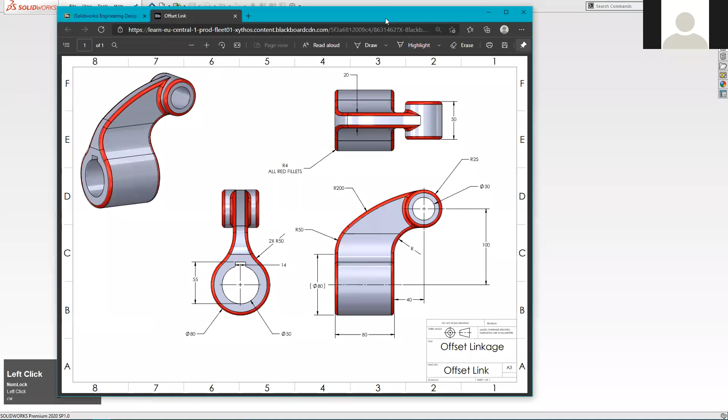In this week's session, we're going to continue with a little bit of that work that we sort of stopped halfway through last week. If I remember rightly, we were modeling up that linkage part. So it would be, if I just share my screen, that drawing that I seem to remember we were trying to replicate. And we got a certain way through the actual task of doing that.

So correct me if I'm wrong, but we'd sort of modeled the majority of the body of this. We'd done the lower pipe and we'd done the upper pipe. We sort of started the job of creating the spine that links them together. And the various groups that I take for this module got to different points of success creating that spine. So I think some of the groups moved on to creating this fillet feature,

and some of the rest of the groups were still, if I just load up one of my copies of that, let's have a little look. 2021 lessons. So something like this one, I believe, is where we left it, where there was possibly a bit of a discrepancy between the bottom of the spine feature that we just created and the lower tube. There was a sort of wedge of material that was missing. So I think more or less all the groups got to that sort of stage.

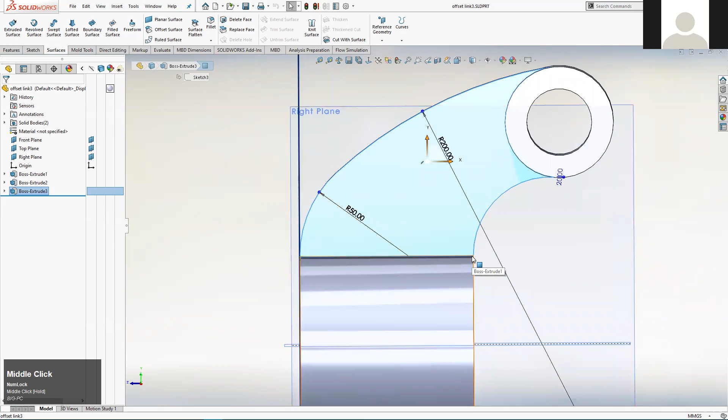And I think at the time I said, well, the sketch that we've created for this spine feature, or this piece of material that's joining these two tubes together, because we'd sketched it on the right plane there, we were actually looking at this lower tube like that, and we were creating a horizontal line there to close the sketch off, but that horizontal line was corresponding to the highest point on the tube there.

And obviously, as our extrude feature extrudes outwards from the sketch, the tube kind of drops away from it. So the tube is obviously a cylinder, so it's dropping away all the time. So you end up with this wedge of material that's actually missing. So I think the first thing that we'll do is we'll drop back into the sketch for that spine feature that we created with an extrude, and we'll address that.

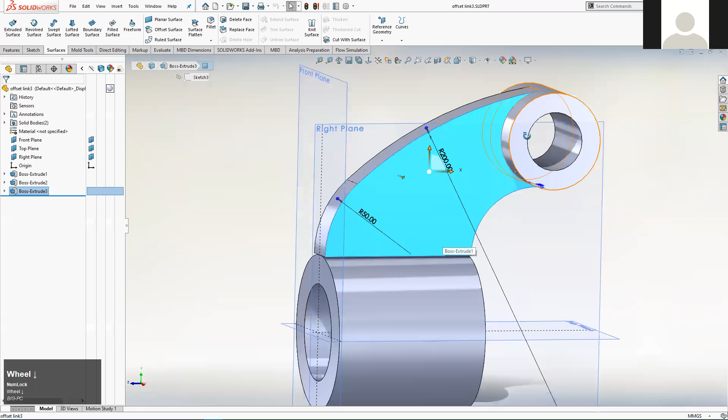And I think what we'll do, it should be more or less obvious, we'll lower this bottom edge down into the tube, so there's overlap then between the new feature that we're creating and the existing feature, which is the tube. And then what the system should do, which is its default behavior, is it should essentially weld them into a single piece of material. So it will merge them together into a single block of material.

And I think I talked with most of the groups about the fact that that's the default behavior of the system. If two features overlap each other or touch each other on any of their faces, the system will merge them into a single piece of material. And just to investigate that a bit further, you can see with the upper tube, because our new feature does in actual fact touch the upper tube, we created that arc in the sketch that matches the outside diameter of that tube. The system has actually welded those two together into a single block of material. So you can see I've highlighted it in blue on my screen there. So yeah, that's the default behavior.

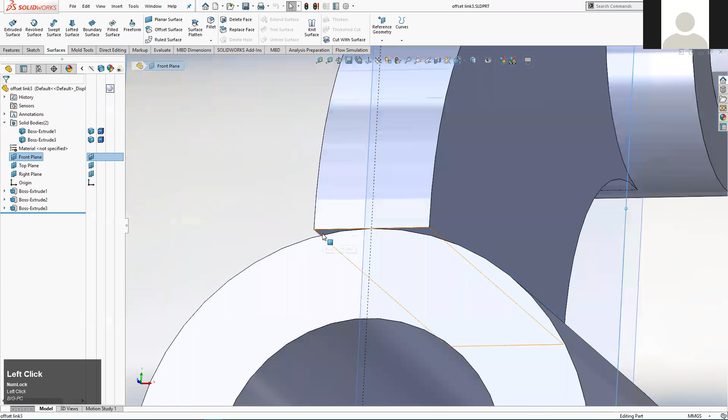But then if you don't get positive overlap, which we haven't got here, we've got the lower face of our new feature, this flat face, just theoretically touching the tube at an infinitesimally small contact patch. So the more you zoom in using this graphics window, the smaller that patch gets. So essentially they're not overlapping, they're not touching. So the system has refused to merge them into a single piece of material. So we're now going to correct that.

We're going to go into the sketch, modify the sketch, create some overlap there, and then the system should merge them together. Now what we're going to find is the system has set some options in that extrude that mean that we have to do a little bit more work to get them to merge now. But it's worth knowing how to correct these little problems that you may encounter.

So the first thing, let's go into the sketch. So in order to edit a sketch which is being used to create a feature, you just find the feature over here in the feature manager. So it's this last feature, this Boss Extrude 3.

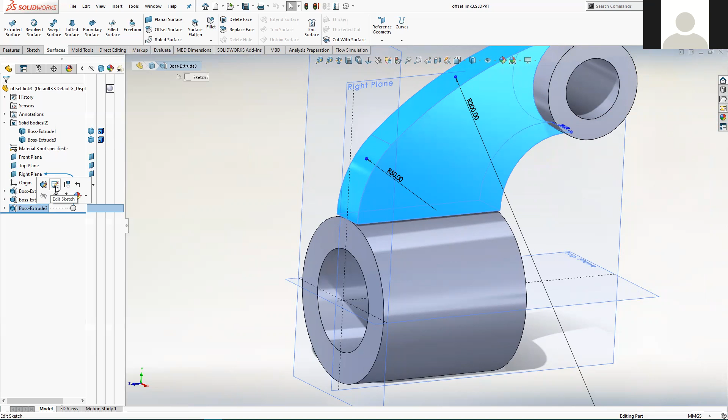Click on it, and then the second icon there on the top line of icons is edit the sketch. The first one is obviously edit the feature itself, which we're going to do in a second, but we want to edit the sketch first that's actually being used to create that.

Then, as we covered, I think a couple of weeks ago, I've now set my system to auto-rotate my view round, and I'm sure I showed everyone how to do that. So that's why my view is now looking square at the sketch, or at 90 degrees to the sketch, or as the system calls it, normal to the sketch plane.

So what are we going to do? I think the first thing I'll do is delete that existing horizontal line at the bottom of the sketch. So I'll just click on it and hit the delete key.

Someone asked in one of the other sessions, they were on a Mac and they said, I don't have a delete key. And I think, if anyone's using a Mac and using emulation to run SolidWorks, it's Shift and the backspace key. So yeah, I'll give you the benefit of his knowledge.

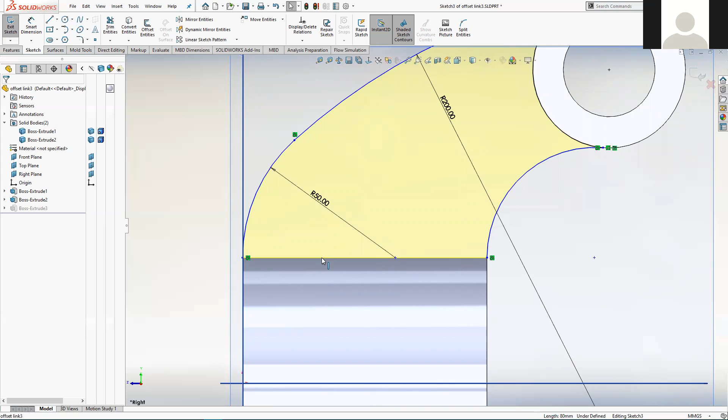So something's happened there. So you've got to be observant. The lines here, the arcs that we created that were previously fully defined, have now become underdefined as soon as I deleted that bottom edge. Because I've done this sort of tutorial a few times this week already, we've seen this already.

So what has happened is the endpoints of these arcs, that one and that one there, weren't actually locked onto the top edge of the tube itself. They were locked onto that horizontal sketch line that we'd then locked onto the top edge of the tube. So when that horizontal sketch line disappears, they're not attached to anything. They don't have a coincident relation with anything in particular.

And you can investigate that further by clicking on them, holding the mouse button and trying to drag them out of position. And you can see you are able to drag them out of position now. But that's an easy one to fix. Whilst you're dragging them, if you drag them back over the point that you want to lock them to, the system should auto add. I'll try that again.

It's added one of them. So you can see now mine's added a coincident relation with that vertical edge. So all I need it to do now is add one to that horizontal edge. So again, I'll click and drag, see if I can make it do the job. It's still not working. All right. Well, there's more than one way to do this.

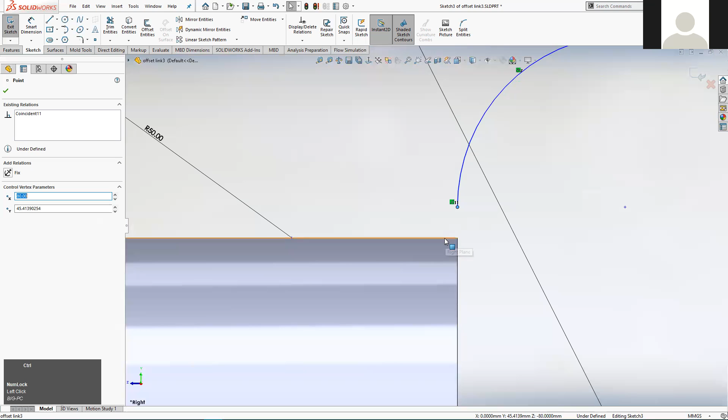The second way that we can add relations, and we've done this time and time again, is select the entity that we want to add the relation to, hold down the control key on the keyboard, select the other piece of geometry that we want to relate it to. So in this case, it's that top edge there that's highlighted in orange. Click, and then we can add a coincident between them. Don't click on that one because that's a midpoint. So coincident is what we want. So you can see I've fixed that one.

Now I'm going to hide the planes when I fix this one because that vertical plane there is kind of getting in the way. So I'm just going to temporarily hide the planes. And I'll see if I can get this one to do it using the drag method. So I'm just going to drag it to the point there and then let go. Yeah, it doesn't seem to be behaving itself too well this morning. Let's see if we can make it work. No, I'm going to add that one in manually as well.

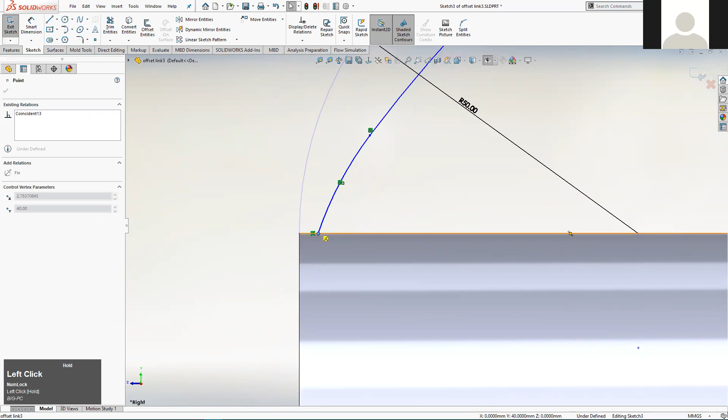So again, it's done half the job there. It's locked it onto the top edge for me, but I also want to lock it to this vertical here as well. So I've got the point selected already. I'm going to hold down control and I'm going to select the vertical edge there and just make them coincident with each other like that.

So yeah, there's a little bit of correction and a little bit of fixing the sketch after we delete that lower line. So the next decision is, we know we're going to put a horizontal edge down here and two extra vertical edges to link to that horizontal, but how deep into the pipe do we want to draw this sketch, which is a valid question. And probably the smartest way to set this sketch up is not to give it just a dimensioned depth that overlaps with the pipe.

But to make it overlap to the point where it meets the inner internal bore of the pipe itself. So if we sketch this vertical line here so that it meets that inner cylinder or that inner bore diameter of the pipe itself, and then put a horizontal that coincides with the inner bore along there, and then put another vertical to join back up with this end of the sketch,

then we can be safe in the knowledge that if this design ever changes and that internal bore gets smaller or increases and gets bigger, that our sketch for this spine will auto adapt to that. It will actually change its size and scale to adapt to the changes that we've made to the pipe section there. So that's probably the safest way to set this up.

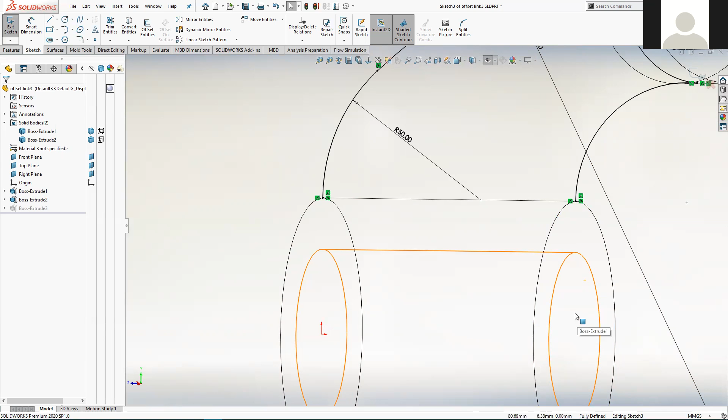So I've just rotated sideways there, and I've switched on wireframe display. Normally we have what's known as shaded with edges as our default display method. But I've switched on wireframe because that allows me to see through the lower pipe and see that inner wall as I'm creating my sketch.

So the way that you do that is that icon at the top. And there's various methods to display the model. There's just shaded or shaded with edges or various other wireframe-esque ones. But it's the bottom one that we want, where every edge on the model is visible, whether it's at the other side of the model that we wouldn't be able to see if we were looking at it in real life, and all the edges on the side that we are actually viewing the model from as well.

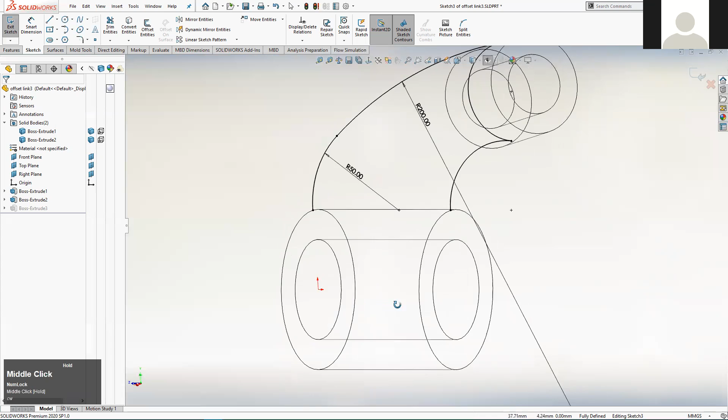So I'm going to rotate my view back round to be normal to the sketch plane, because that's the most useful viewpoint to actually create these edges. So normal to, there we go. And I'm just going to get the line tool and put a vertical line down that edge there to that point, and then keep sketching with my line tool and put a horizontal edge to there. And again, I've still got the line tool active, put a vertical edge back to that point there. And that should close my sketch up again.

And we've done what we set out when we came in here. We've sunk that extrude feature down into the pipe. So there's definitely going to be some positive overlap between the two pieces of material now. So normally you would expect the system, when we OK this sketch, to unify these two pieces of material into a single solid whole piece of material, as it did with the upper pipe and the spine. So let's see if it does that.

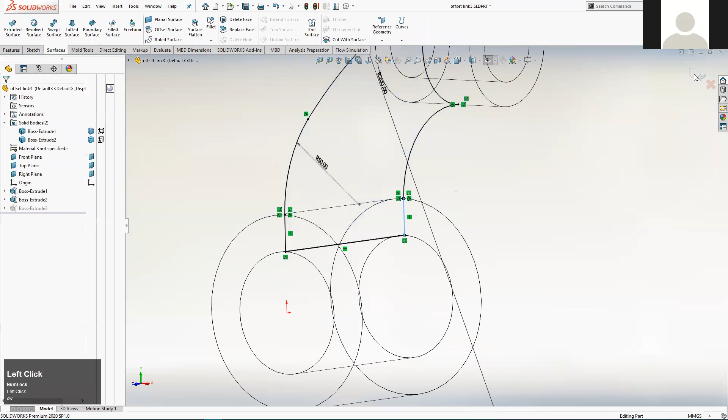So we'll exit the sketch. We'll press the blue exit sketch icon. We'll turn our view back to shaded with edges, which is our default view setting. And then if we rotate around, it looks as if there's something odd happening there now. So if I zoom in a little bit and then just click on the end face of this pipe so that I can highlight it in blue.

And then with that highlighted, if I move my view around, you can see what's referred to as graphical tearing. And that's occurring because it hasn't actually unified these two bits of material into a single piece. So what's attempting to be shown there is that the flat end face of that extrude that we just created, that face there, is trying to occupy the exact same point in space as this big flat face on the end of the pipe.

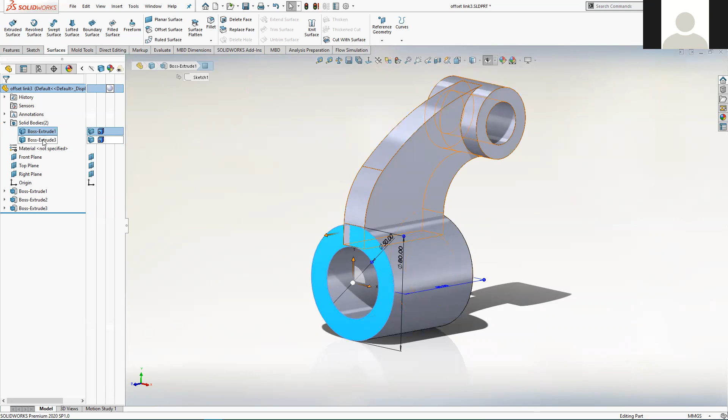And the system's struggling with that, which is why you see the grey face jumping through and being shown on some angles there, and the blue face jumping ahead of the grey face. So there's something wrong there is the bottom line. And we can double check that: if we look up here, there's a little folder that says solid bodies, and it should have a brackets 2 after it. What that's saying is there's not one unified body of material in your part, there's actually 2. And if you click on them, you can see them highlighted.

So we've only half fixed the problem. We fixed the shape of the sketch, but there's an option in this extrude feature that got switched off, and we now need to go back in and switch it on. And the reason it got switched off is when we originally made that feature, it didn't overlap with the lower pipe. So the system automatically switched this option off that we're about to correct.

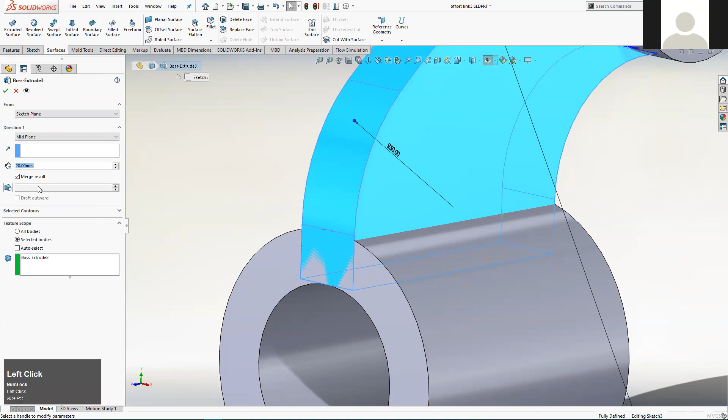So we're going to have to edit the feature this time. So we're not editing the sketch anymore. We're going to edit the spine feature. So find the feature that you want to edit in the feature tree or the feature manager. Click on the first icon, which is edit the feature rather than edit the sketch. Now we get access to all those setup options that we had when we were creating this feature.

And there's two that we want to check the status of in here. Is the merge result option ticked? Yes, it is. So that's not the issue. If that was unticked, the system wouldn't merge this feature into any of the other features. So that was not the problem because that was actually ticked.

Lower down the page, I've actually just done something there that changed what was lower down the page. So if you haven't messed with this feature here, what you'll be looking at the bottom of the page is feature scope, selected bodies, and the system will have auto-selected just the upper tube to merge with. It won't have selected the lower tube. So what we normally do with this is just switch it back to merge with everything that you overlap with, which is all bodies. So feature scope.

So with those two options, switch to these settings, merge result and merge with all bodies. Then anything that this feature overlaps with, it will get merged together with them. So that's the setting that we want. And that only got switched because when we created that initial sketch, it wasn't overlapping with the lower tube. So the system kind of plays with those settings to make the feature work in some way. So anyway, we've merged them together now.

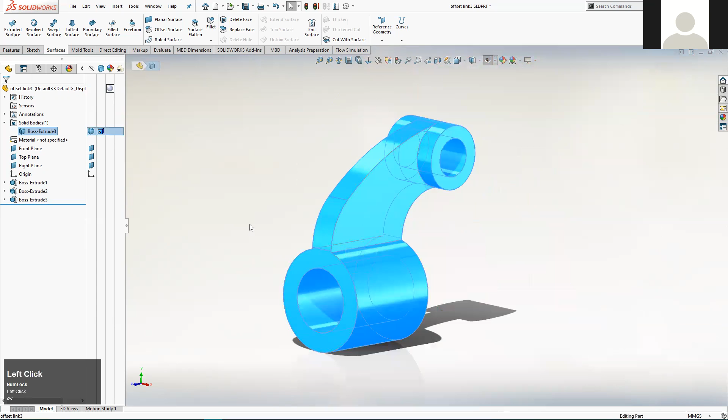And what I've got on my readout here is that I now have a single solid body in this part. So the whole of this part is essentially made out of the same block of material, which is what we want. You probably won't see that on your interface because I've set my SolidWorks up to always show this folder.

Whereas I think the default in a new install of SolidWorks is that when you only have a single body, this folder is hidden. It disappears because you don't need to really be aware of it. It only appears when you get more than one body actually in a part. So you will have been able to see it before, but then when you corrected the problem, it will disappear by default. So let's try and progress on to the next feature.

Let's have a little look at what we're going to tackle next. So I think what we'll go for in terms of the workflow is we'll put that large fillet on. So there's a large fillet there that kind of bridges the gap between this lower tube and the side of our spine feature that we've just created. And if we want to know what size it is, it's annotated there, 2 times 50mm radius.

So it's a 50mm radius fillet, and because there's 2 of them, we can assume that this one on the other side of the part is actually 50mm as well. So we're going to put those 2 on. So that should be relatively easy for us. So as we said when we used the fillet tool a few weeks ago, it is available up there as an icon on the features toolbar. Features toolbar, fillet feature is there.

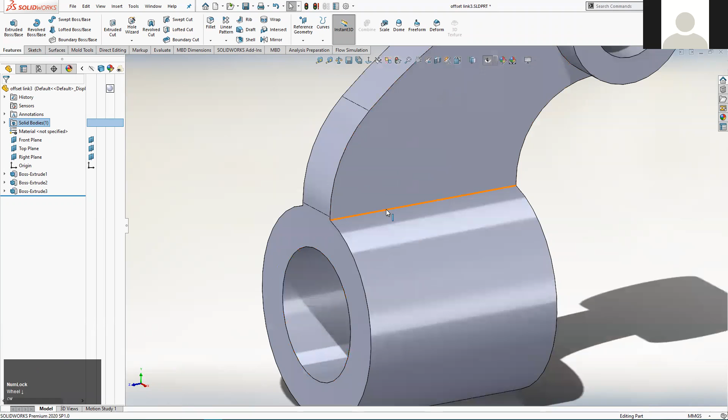But by far the easiest way to activate it is just click on the edge on the model that you want to apply it to. And it appears there in the quick access toolbar as well. So click on that. You should get a preview of what it's looking like. That's too small. So we will double click on that 10mm value and put our 50mm in and press enter. And then we want to apply it to the mirror image of that edge. So I'll rotate around and select that second edge as well.

And again, if you're not seeing the double preview there, so a preview in yellow of each edge, it's probably because you've got partial preview selected there. So partial or full preview, depending on which one you want to see. So that looks okay, so we can OK that. That's an easy one to put in.

Then I think we'll tackle those red fillets as they're highlighted on the drawing that we're working from. So you can see the logic of using colour on this drawing, which is moderately unique on drawings.

A lot of the drawings that you see are just line drawings, but there's some justification for using colour on this drawing, and that justification is all these fillets which are of radius 4 have all been coloured in a specific shade or a specific colour to allow you to pick them out easily on all the views. So the colour and the shading in this instance is actually there for a reason. So all the red geometry there is 4mm fillet feature.

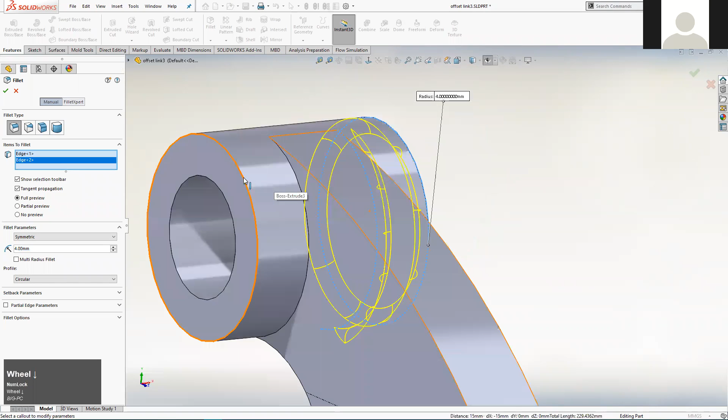And it's just a case of working our way around applying this to all the various edges that it's actually applied to on the drawing. So it's applied to that little internal one there. So I'll click on that one. And then just so I don't forget, I'll do the mirror image of those two on the other side of the part. So I'll do that one and that one. So we've got all the ones that are kind of centered around that upper tube shape.

We've also got it applied to the top edge of the spine there. So if I click on that edge, now that will automatically run a fillet all the way around all the neighboring edges there. And the reason it's doing that is that every single edge on that chain of edges there is tangent to its neighbor. So the fillet by default will run around all tangent edges. So that's why it's saving us time there. So we don't have to click all the way around to get all those edges.

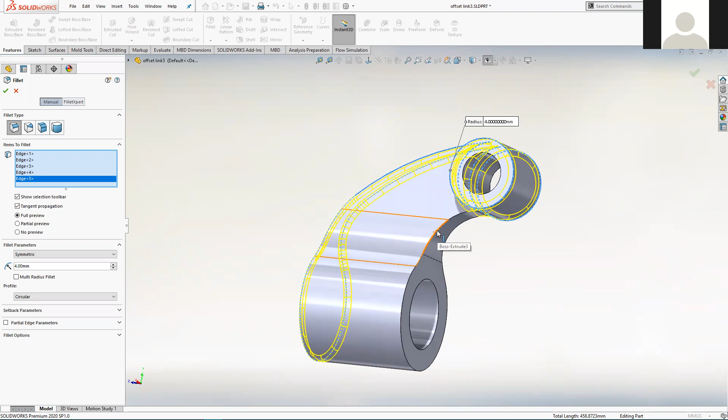And the same will happen when we select this lower edge here. So we can click on that edge. And again, all the neighboring edges there are all tangent to their neighbor. So it will just keep running round as long as those edges continue to be tangent to each other.

And if we delve back into how we created this shape, we ensured that the upper arc there on that sketch was tangent to the lower arc. And we also ensured that lower arc was tangent to that vertical face. And we also ensured that upper arc ran into the edge of that tube and it was tangent. So we've designed that into the actual part itself, that all these edges are all tangent to each other. So when we've got them all selected, we can OK that fillet feature, have a little look at it.

Again, little differences between what you've seen on my screen and what you're looking at. You may not have this dashed effect at the edges of your fillets. Yours may be shown in solid unbroken lines, a little bit like the line that marks the edge of this tube. Don't worry about that at this point. I was doing another tutorial earlier in the week, and it was necessary for me to modify my system slightly, so I was seeing these. I'm a little bit hazy on what the default is when you first load SolidWorks, as I've changed that backwards and forwards so many times, so yours may look exactly like this, or it may look slightly different, so don't worry about that.

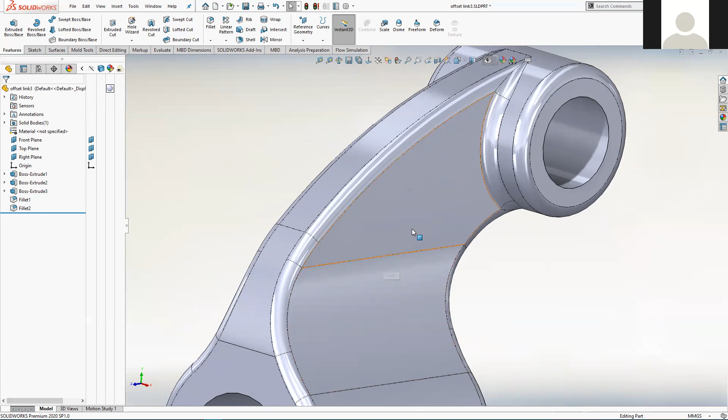So what are we going to do now? Let's have a look at applying that actual red colour to this fillet feature specifically. So you can apply colours and appearances, to give them their correct name in SolidWorks. You can apply appearances to either the part as a whole, to specific features, to specific faces on the part, or to combinations of all of those. So currently the part has a single appearance applied to it.

And if you want to click, I'll try that again. I always make that mistake. If you want to click on that little, it's known as a rollout arrow there. So up in the feature manager to the top right, there's a little arrow pointing to the right. And if you click on that, you get this extra rollout at the side. And the reason I've done that is at the top level there, the part level itself, so the entire part, is coloured currently in this default grey colour. And you can see that represented by that sphere that's coloured in grey. So we don't want to apply a colour to the entire part. We just want to apply it to this fillet feature.

So what I'm going to do is click on the fillet feature, and then it's that icon there to edit the appearance of something. And in this case, it's the feature that we're going to edit the appearance of. So then when I click on that, the system's basically offering me the choice. Do I want to change the appearance of the entire part, which is currently grey, or do I want to change the appearance of a specific body, which we now know we only have a single body in this part, so that essentially means the same thing, or do we want to change the appearance of the feature that we clicked on only? So in this case, it's the feature only.

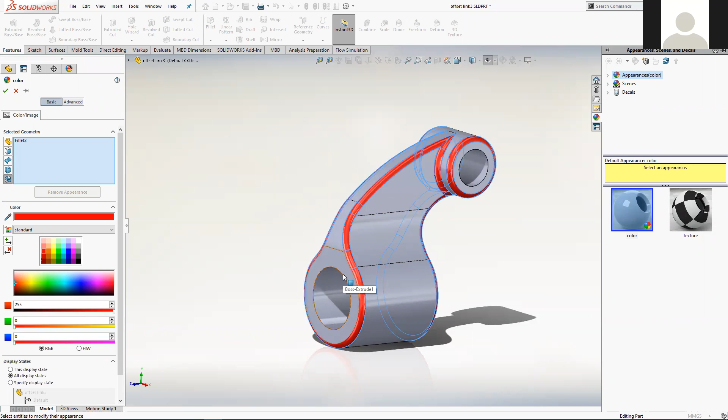So click on the fillet from that list, and then we just get a standard color palette that you see in a lot of common graphics programs. You can drag around the whole palette here and come up with a specific shade, or you can just pick a default shade from this range of default colors at the top. So I think we'll just have that default bright red. I think that's what the original drawing was set up with. And then you should get a preview of what that's going to look like. And if you're happy with that, click on OK.

And you can see in our pop-out panel at the side now, the fillet feature has a specific color applied to it, so you can see that there. And if you needed to go in, you could click on that and go to appearance. Let's say you want to change it to a green color. You can do that. So you get the idea. You can apply the actual color per feature.

So we've done that. There's one last bit of this design that we need to add before we get on to producing the drawing, and it's this section here. So the thought here, although it's not indicated with the note, is that this is what's known as a keyway, and there'll be some form of shaft that sits in this lower internal bore, and that shaft would probably have a matching keyway machined into it. And what you would do is slide a key, which is a little block of material, in between the two, and it would lock the rotation of this component and the shaft together so that they couldn't spin relative to each other. They'd be locked rotationally. So yeah, we need to put that feature in.

So we're going to do it with an extruded cut, which should be relatively easy. And I think we'll place the sketch on this front flat face of this tube feature. So extruded cut is the feature type. Where do we want to sketch it? We'll sketch it on that front face. The view should rotate round. What sketch shape do we want to use? I would say center rectangle, because from those drawings you can see that slot is dead center in relation to the tube shape itself. So I'm going to use the center rectangle because that allows you to drop a point initially in the center of the rectangle. So it's the one that we want.

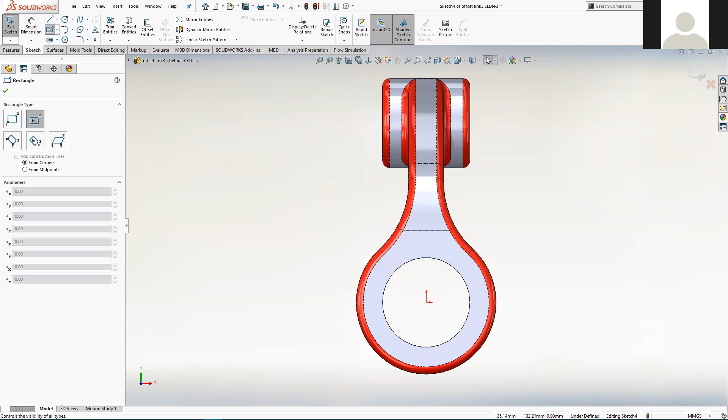Center rectangle. If I hover above the origin there, you can see it's creating a dashed line down to the origin, which basically means you're directly vertically above the origin. In fact, what I'll probably do is make the planes visible again. That will be more useful for us. I've had the planes invisible for a while. I'm going to bring the visibility back again by clicking up there. And the reason I've done that is it will then lock this center point onto that vertical plane there. So that's what I want it to do.

So I'm going to click to drop the center, drag it into approximately the right scale, so it's going to cut this keyway around about there. Then press escape because I don't need the rectangle tool anymore. And then I'm going to add some dimensions onto it. So click on Smart Dimension and do the width of the top edge there, which should be 14 millimeters, like that.

And then if we have a look at the drawing, just to see how the height of it, if you want to call it that, is dimensioned, you can see there's a length dimension there from the top edge that we just clicked on all the way down to the furthest point away on this circular edge, which we've encountered before.

That's not the default way that the system dimensions to a circular edge. Normally it will try and dimension to the center point, but we've experienced it when we did that slot shape on top of the tire lever. If you hold down Shift before you click on the circular edge, you can force it to dimension to the outside edge of the circle. So that's what we're going to do.

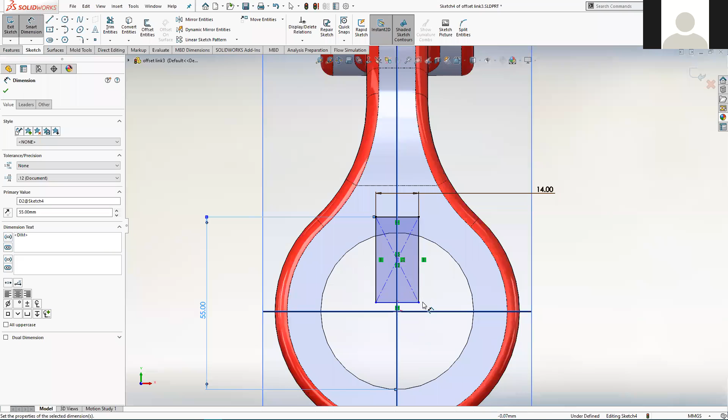So we've more or less locked down the shape of this now. To investigate what's still free to move on this circle, I'm going to hit Escape to get out of the Smart Dimension tool and drag one of these blue points. Yep, it's still free to move vertically. So I'm going to try and use the old dragging the point onto the plane trick again, and let's see if we can get this to lock itself on. So I'm dragging the point, hover over the plane, let go. Yeah, so it's put a coincident relation between the two there.

So that's the behavior of the system. It mimics how it behaves when you're creating sketches. As you're sketching lines, it's offering those relations to you by showing a little icon as you hover over something. You can get it to do the same thing by dragging sketch lines around as well. Sometimes it works, other times you have to do it manually. But we know how to do both methods to add relations in.

So yeah, that should be fully defined now. It's a closed boundary, so it's always worth doing those two checks. You can have a look at the bottom, fully defined. It's been shaded in, so it's closed, so we're happy. We can exit the sketch. And then I'll rotate my view so I get a better appreciation of what's going on there on the preview. And I think in this case, we'll use Through All.

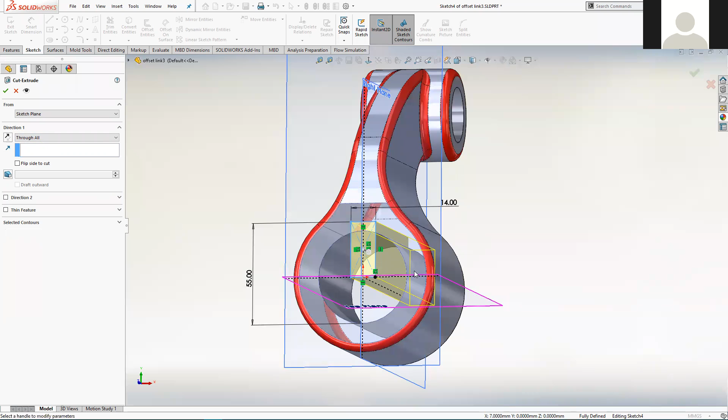So again, giving this particular feature a blind dimension is arguably not the smartest way of setting it up, because from this design, I would say the intention of this keyway is that it always breaks through to the back face. So Through All will achieve that, whereas a blind value is prone to not achieving that if the design of the part changes at all in the future. So Through All, okay, and that's it. That should be the entire part finished.

So the next step is we're going to attempt to recreate that drawing, to get a bit more practice on creating drawings, which we've done a little bit of already. We need to practice that workflow of creating our parts first, be they a copy of a part that we've been supplied a drawing of, or coming up with our own part designs. So modeling the parts is half the workflow. And then when we've got the part models, producing engineering drawings to pass on to manufacturing, quality assurance departments, or suppliers and subcontractors. So yeah, that's what we're going to practice.

So the first thing we're going to do is take a save of this completed part. So just click on that save icon at the top. You should have already named it because you loaded it in at the start of this session. You can see mine's a little bit different. I've had to put a 3 on the end of this particular one because you're the third session in the week.

So I've been keeping copies of this. Yours should just be called offset link, because that's what it's called on the drawing. So with that part still open in the background, so don't shut the part down, what we're going to do is just jump straight into creating a drawing of the part that happens to be on the screen at this point.

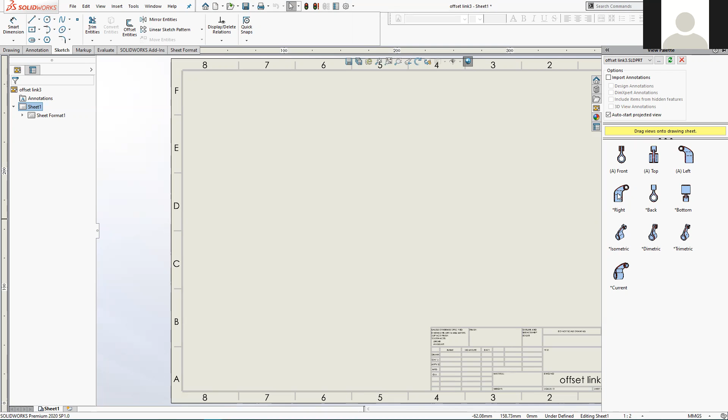So back to the view palette, I can see it there. So this is why the view palette's quite a nice tool. When we were doing the tire lever, we were working over here and we had views that were just labelled as right and left and top and bottom and front and back, but we couldn't see what they look like in the menu. This allows us to just quickly see what those views are going to look like. So I know it's this one that I want, so I just left click on it, hold the left mouse button and just drag, and then drop it onto the sheet like that.

So it's a really easy method of getting views onto the sheet. And then the default behavior that the system goes into is, as I move my pointer away from that view, it gives me projected views. And you can see the projection lines there, or the center projection line in grey, coming away from the center point of the original view.

So what I'm going to do, I'm going to click to drop a view to the left of that one, there, and then I'm going to move above it, there, and then click again to drop a second view. And then I don't want to drop any other views. So if you can see there, there's a little icon next to my pointer that looks like a mouse with a green tick on the right button.

So it's another time saver. Instead of going to the top right of the screen and clicking on that green tick, I can just press the right button and it okays the operation that I was just doing, and it exits out of that operation. So there's always multiple methods to do the same thing, but there's often a shortcut that the system offers you rather than moving your mouse pointer around the screen too much. So it's trying to speed up your workflow.

So we'll drop that 3D isometric view up here, and then we'll be done with actually placing the views on our sheet. At that point, we'll address the fact that none of these views are shown in their colored shaded form. So we'll tweak the actual setup of each view then.

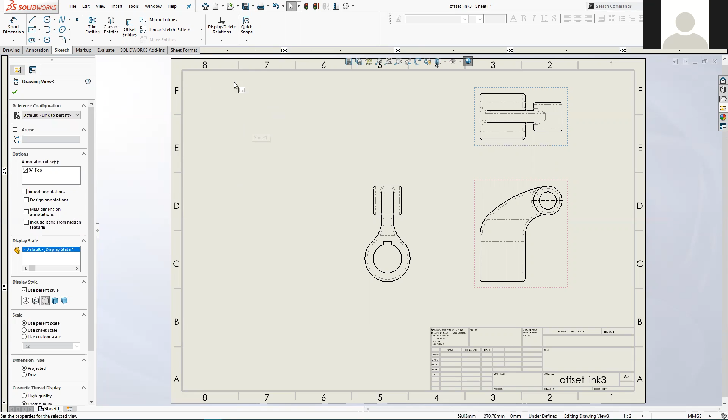So we want to place a view up here, but this view has got no relation to any of these really. It's not a projection of any of these, in the same way that this one was a projection of that and this one was a projection of that. It's its own thing. It's viewing the model from a certain 3D viewpoint, but as I say, it's not dependent on any of these other views.

So the way that we're going to place that is we have to go into this first tab at the top of the screen, which I've been informed by some people on their systems doesn't say drawing on the tab. Mine says drawing, that's the label of that tab. Other people's, I think they're slightly different versions of SolidWorks, say things like view layout. But either way, it's the first tab that you encounter at the top there.

One of the first icons in there should be this one, model view. And it does what it says. You can see in the description there, adds a single view based on your existing part or assembly. So that's what we want to do. Click on model view. It then says basically you've got one part file open currently. Is that the part file that you want to create a view of? In our case, there is only one answer, yes, because we don't have another part file open. So I'm going to go on to the next menu, essentially agreeing to that.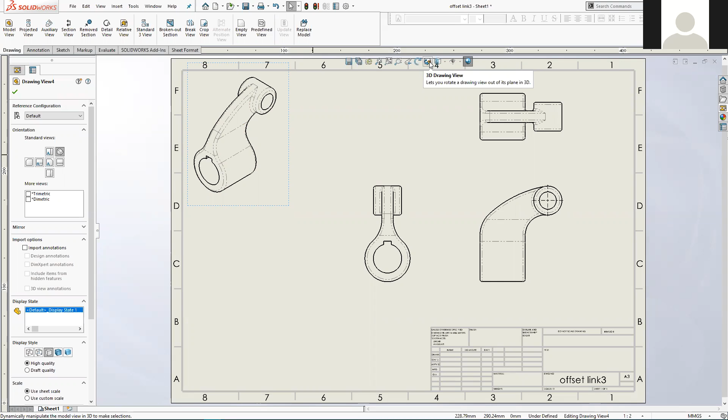So we want to rotate our viewpoint slightly to match the drawing that we're working to. So let me see if I can get the drawing and this on the screen at the same time. Yeah, I think that's working. It's not disappearing. And with that view still selected, so I deselected mine momentarily then, but I've reselected it. Click on that icon, 3D drawing view, and then click with your left mouse button and hold down, and you can drag that view around on the actual sheet itself.

So we're trying to match what we're seeing on the reference material. Yeah, somewhere there is approximately right. So when we're happy with that viewpoint, click on the green tick. And then the next thing that we're going to address is the fact that none of these views are shaded currently. So again, with this view selected, if you happen to deselect it, you can reselect it by clicking on the rectangle that appears when you go near it. So click on the rectangle. I've now reselected this view.

In the left hand side, all the setup options related to that view become available, so you can see them all here. One of them is display style, which we played around with when we were actually creating the part itself, we switched into wireframe mode. So you can see that shaded with edges, which is the default that we create these parts with, is available there. So I'm just going to switch over to shaded with edges.

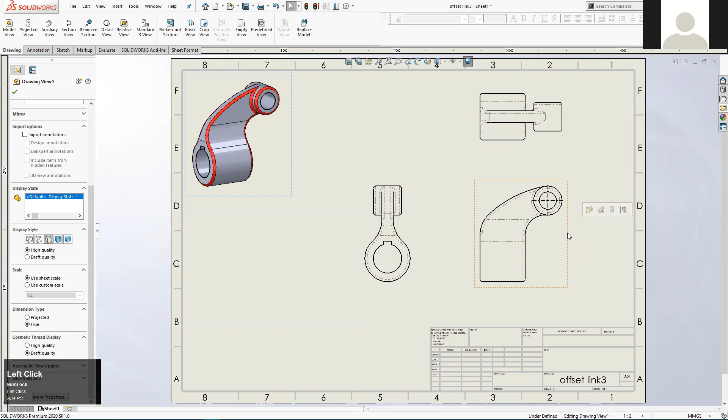And then I'm going to do the same thing for this first view that I dropped. So select the view by clicking on the rectangle that appears around it. So now that view's selected. Switch it to shaded with edges over here. And because that is the parent view of these two projected views, they also change as well. So they follow the display style of their parent. Now you can override that, but that tends to be the method that you want it set up with by default. So there's one last thing in terms of these views that we have to sort out before we can move on to adding some dimensions and annotations to them.

And that is their scale on the sheet is slightly different to the reference PDF again. So these views on the reference PDF seem as if they're a little bit bigger on the sheet. And if we want to confirm what scale this sheet is shown at, we can zoom into the title block, and yeah, it's at a scale of 2:3. And then ours, if we do the same thing, is at 1:2. So we want to change the overall sheet scale. We're not going to do this for each view, because there's an overriding scale that all views on the sheet will default to, and it's that we want to actually change.

So we're going to deselect all views, because you can see I've still got this view selected. You can do that quickly by pressing the escape key, the same way that we do when we're in sketch mode and we want to get out of the tool. So just press the escape key, so you've got nothing selected. And then what appears on the left-hand side here is, it's still erroneously called the feature manager, although it's arguably the drawings manager now. So the makeup of our drawing is shown there in the order that we created it.

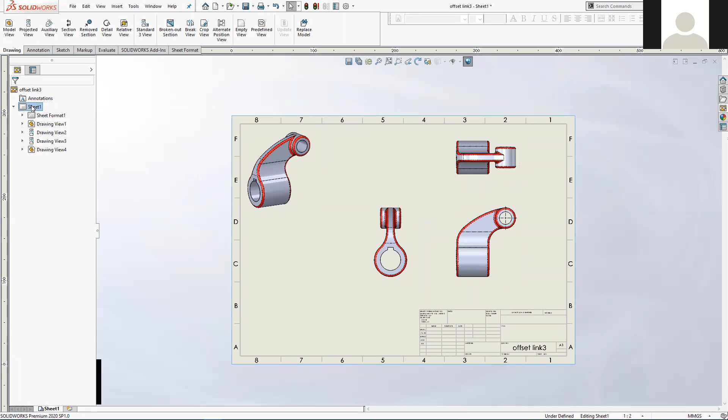And then right at the top level there, there's something called sheet, which encompasses everything. So it's that we want to modify, the actual sheet itself. And any change that we make there will run through into the child features. So if we right click on the sheet icon and go to properties, then that takes us into the actual sheet setup itself. And 2:3 is what we want to set this to. So you can see there the sheet scale, 2:3.

And then just to confirm, for all these drawings and all these drawing activities that we're doing, we're going to use third angle projection, which I'm assuming you covered with Saj, the difference between first and third angle. But as if to illustrate it, I'm going to apply this scale change so you can see the effect that just had.

You can also see that I'm going to have to click and drag some of these views back into the most sensible position, which you can do just by clicking on the rectangle around them and dragging them around. What I'm going to do now is switch my sheet to first angle just to illustrate the difference. You don't have to do this, but I'll switch from third angle to first angle, press apply, and watch that view and that view.

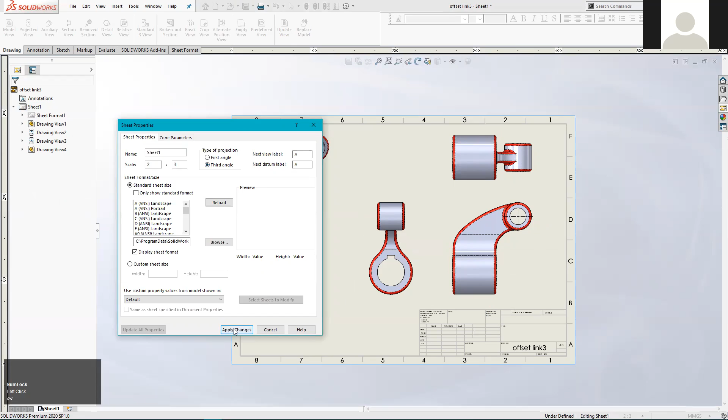There you go. So you can see as I project away this time, the actual part essentially rotates in the opposite direction. So I end up looking up from below onto the underside of that lower tube shape. And the same here, it rotates, so I end up looking from this direction. So first and third angle is the direction that the view rotates as you project away from the parent view. But we want third angle for all our drawings, so I've set that back to third angle now.

So I'd say in terms of placing views and setting up the views in terms of their appearance and scale, we're done. So this first tab, which is all related to creation of new views of the model, we don't need to be in there anymore. What we're going to do next is start putting dimensions on this model. So we're going to move along to the next tab, at least on my installation. Once I was made aware of the differences the other week by a few students, I looked on the internet, and I'm sure I've seen the drawings set up with an extra tab slotted in between these two. But it's the annotations tab that we should be in.

And in terms of adding dimensions to a model, there's two primary tools within this drawings mode that you can use to add the dimensions in. The first one is the Smart Dimension tool, which works very similar to the Smart Dimension tool that we use when we're in the sketch mode.

The second one is to import the dimensions directly out of the model itself. That pulls through all the dimensions in the sketches that we created, some of the dimensions in terms of the depth of extruded features or the radius of fillet features. You're able to just import all of those. So you don't place them manually by clicking on edges. You just say import them all and I'll delete what I don't want. So we're going to use that tool first.

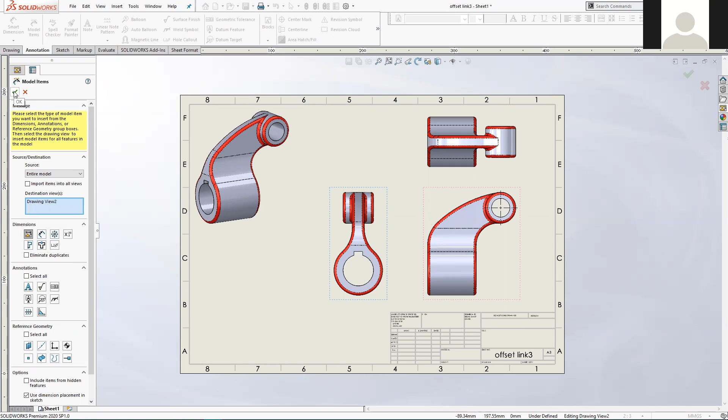You can have the ability to go in and unmark certain ones that you don't intend to bring through. But we're not getting into that much detail. And the default setup is that the system will just tick marked for drawing for every single one. So that's okay. So then we're just going to click on the green tick and see what comes in.

And you can see, as I said, we've got more than we need, and we're going to delete the ones that we don't need and then repeat the operation again on one of these other views. And you'll see this operation gets easier and easier, because when you import it on, say, a second view, the system will look at the ones that we've kept on this view and not attempt to import those ones. So it's kind of smart in that respect.

But what we'll do now is we'll delete the ones on here that we don't want, and we'll keep the ones that we do want and just reposition them a little bit. So you click on a dimension. If you don't want it, hit the delete key to get rid of it. And then I'm just glancing over at the reference PDF, so I don't want that one. Do I want that 50? Yes, I do. And I do want the 80 as well.

If I can drag that one, it's not letting me. So, do I want the 14? Yes, I want the 14. Aha. So I may have to go back and address that. But yeah, we want that one. We don't want the radius there, and we don't want the 20.

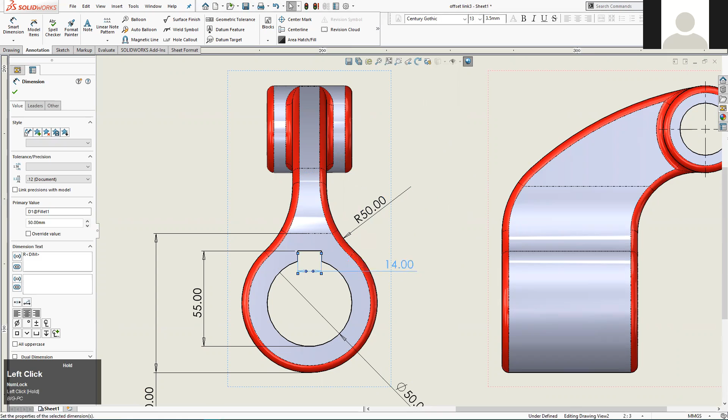But we do want the radius 50, but we want to make it like that, because that's a radial dimension, there's various different ways of displaying it, and depending on where you drag the text to, it has an effect on the arrowhead and how the arrowhead behaves. So yeah, that's essentially the ones that we want to keep for that view. So now we're going to progress on to the next view, so this one here.

So I'm going to click on the rectangle around the view to activate it. I'm going to click on model items. It's accepted that drawing view. You can see drawing view 1. I want to bring them in from the entire model, but this time I want to click on this box here, eliminate duplicates. So that's going to look at the existing views, and any dimensions that have already been brought in, it's not going to add them into this view. So click on the green tick.

It will import some dimensions, and then again, it's just a case of doing a bit of positioning and deleting a few of them. So we want to keep that. We don't want that one. We want that one, but I might reposition the text a little bit. We do want that one. And we want that one a little bit higher up. So you get the idea. We do want this 200, but again, I want it pointing at that edge from the outside.

And what you may be noticing, if you've got that reference PDF on your screen as well, is the appearance of these dimensions differs slightly. So here's what we're working from. So little things like all the text on the reference PDF is all held to be horizontal.

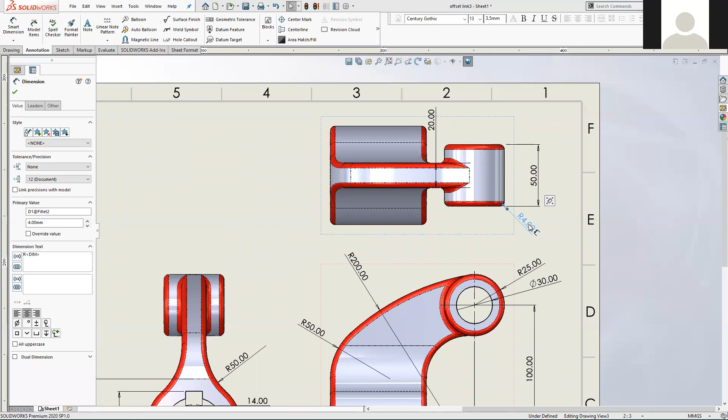And then just for this one dimension, although we may use it for a different dimension, I haven't decided yet, we're going to use the other method, the smart dimension method for placing dimensions. So click on smart dimension, zoom into the feature that you want to add a dimension for. So in this case, it's this kind of radius on the edge of the fillet there. If I can get it to highlight, there we go. And then it will report back that value like that. However, what you're seeing on your screen is probably that dimension is now colored gray.

Now I've been messing around with my options in my system, but let me set them back so that they're mirroring what you're seeing on yours, and then we'll talk about why they're set like that. So you're probably seeing something a little bit more like that. So that dimension that we've added through the Smart Dimension tool by default is colored in gray, whereas the ones that we import using the Import Model Items option are colored in black. And that's useful because the system's trying to communicate how they were inserted, because it kind of has a knock-on effect. So the ones that you import direct from the model are known as driving dimensions.

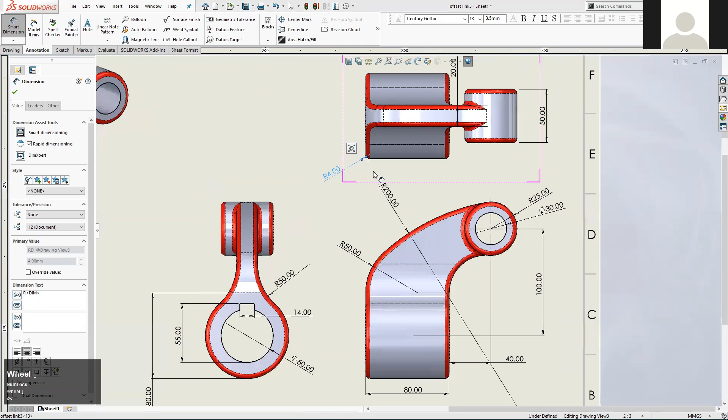And the ones that you place just on the drawing yourself, they're known as driven dimensions, as in these are just reporting back what that bit of geometry is sized as. So in this case, because it's pointing at an arc edge there, it just reports back that that arc happens to be 4 millimeters. Whereas these ones, because they're imported directly out of the sketches, these are the sketch dimensions.

And what I mean by that is I can double click on that 200 and I can edit it from within the drawing. And let's see if we can get it to rebuild in real time. When I click on this regenerate button, is it going to move? No? Okay, I'll click on the green tick. There, it moved. So these aren't copies of the sketch dimensions. These actually are the sketch dimensions. So these are actually driving the shape of the model itself.

So let's see if I can make quite a drastic change. So 150 on there. Yeah, I might have just broken the model. Oh, there we go, 150. So yeah, that's why the system colors them differently, so that it's communicating that they are different beasts. They do different things. These ones just report back to you what that dimension happens to be, whereas these ones are the actual sketch dimensions.

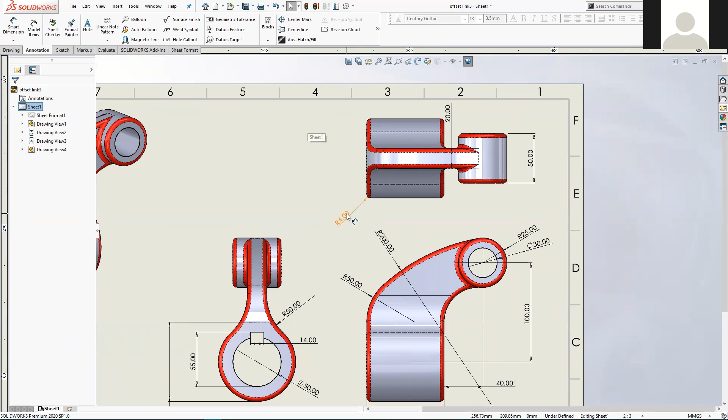Now, that's not terribly helpful if you're saving out a PDF of this to exchange with someone. Maybe you don't want to confuse them by leaving all the smart dimensions as grey, because I've had that problem in the past where I then get a phone call saying, what's the significance of some grey dimensions and some black dimensions? And I have to then explain, don't worry about it, it doesn't matter. So if you are saving out PDFs and you've got drawings that have smart dimensions on them, which you undoubtedly will, because often the way that you create a sketch isn't the same way that you want to dimension the drawing.

In this particular instance, because we've been really kind of on the ball as we created the sketches, it does apply to the majority of the dimensions, but mostly the way that you model things isn't the way that you want to dimension them on a drawing. So you'll use a lot of the Smart Dimension tool.

So in order to get that showing in the solid black color rather than the gray color, you have to go into options, which we've done a couple of times, I think, just to tweak little options to do with how SolidWorks works. Click on options, and then it's in system colors. So colors there, system options, colors. And then what we're looking for is something with the word dimensions and driving and driven.

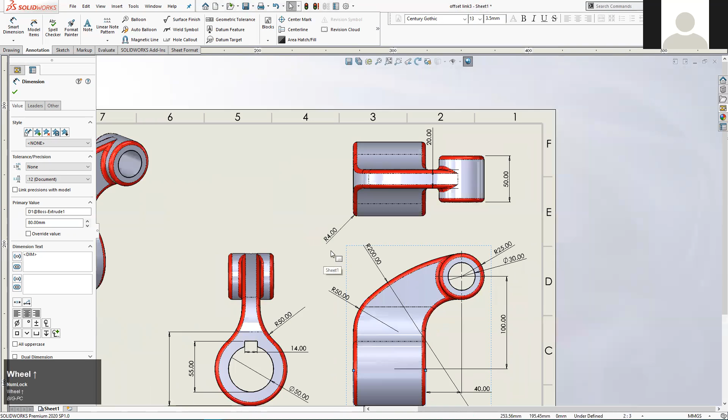And there it is. Dimensions imported, they are driving, so they're colored black. Dimensions non-imported, driven, currently set to grey. So if you don't need that extra information that it's communicating to you there when it's identifying which ones are driving and driven, set them all to black and just OK. So yeah, if you're exchanging PDF copies of drawings, that's kind of the way that I'd have it set up. But it ain't the default, so unfortunately you have to set that.

So what are we going to do next? Let's change the drafting standard, so we'll get the appearance of these dimensions looking a little bit more like the reference material again. So we drop back into options where we just were, but this time we're not going to make a change to the whole of SolidWorks, just to this particular document. So we're going into document properties, right at the top of the screen there, drafting standard. Mine's set on BSI, but I'm going to choose to set it to ANSI. And you can experiment. You can flick through the various standards and click on OK and see how it affects.

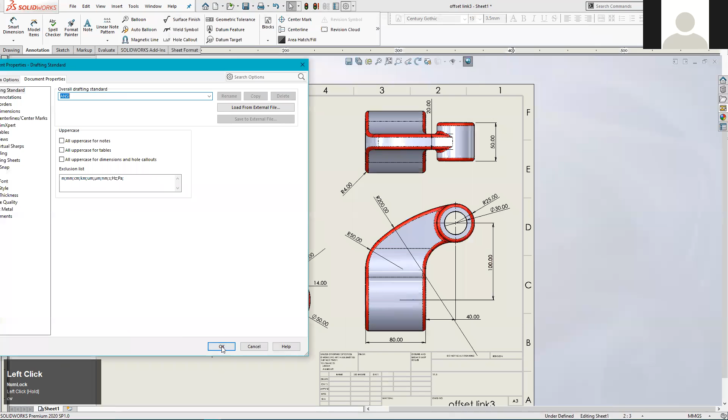So I would argue that ANSI in this case is way clearer, way more legible. It cuts down on all these extra dimension extension lines. It rotates all the text so it's horizontal, so you can read it when you're looking straight at the drawing. Yeah, that would be my preference. So I think we've pretty much done that bit.

Center marks and center lines. So this is what's known as a center mark. You can see it's sort of a big dashed cross shape that's been placed in the center of that upper pipe, that upper tube. Now, in some of the views that get inserted, this does get automatically added to save you the job of putting it in. But in other views, where a tube shape or a cylindrical shape has been broken somehow, so in this one it's been broken by that keyway, it doesn't auto-insert them.

So we're going to manually insert one in the center point of this cylindrical tube shape down there. So that would be classed as an annotation. It's not just dimensions that are classed as annotations, it's all these other various types. So you've got things to do with surface finishes, when people are creating welded, fabricated assemblies, all sorts. Tolerances, center marks and center lines there.

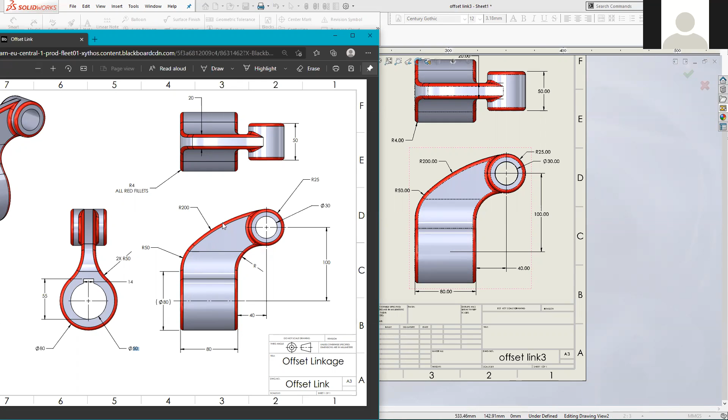So that runs along the center axis of this cylindrical face that we know is present there. So let's add that in manually as well. I don't need the center mark tool anymore, so I'm going to click on the green tick there because I've finished using it. Click on the center line tool. And again, the easiest way to place these is just to click on a face that you know is part of a cylinder. So I know this face here is the side face of a cylinder. So if I just click on that, it will find the center axis and it will put a center line in there.

And again, I can just click off that and I've finished. I suppose we could put one up on this view, but there's not one in the reference drawing, so we'll leave that one. Before we come to edit the sheet format, I think we'll just address the fact that there's a little additional note that's been added there, and then there's a little additional note that's been added there to just clarify that there are two occurrences of that particular fillet feature.

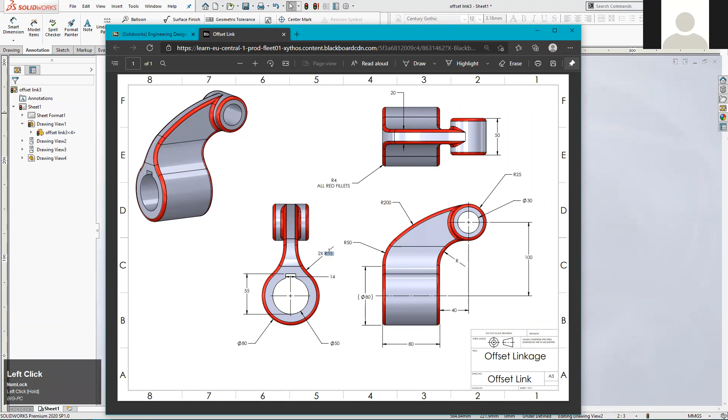So you can see it's saying there's a face here that's got a radius of 50 and there's two of them. So you've got to search around this view to try and find the other one, and it's this matching one on the other side of the part. So that saves you creating two R50 arrows, one for either side. So let's add those in. So let's zoom in a little bit.

There's the R50. If we click on any of these dimensions, single click, that is, all the governing options that create that dimension are available to us there. And the one that's returning this label to us, this 50 and this R, is that little bit of text. So the way that you get the R is simple. You just type the letter R. So the system's done that already.

And the way that you analyze what an actual value is on this model is you open this less than sign, and then you type dim for dimension, and then you put a greater than sign to close that argument. And then the system interprets that as a little piece of code to go away and analyze the radius of that edge. But we can just add our own text into here. As long as we stay away from whatever's contained within those little opening and closing symbols there, we can add whatever text we need. So 2x R50.

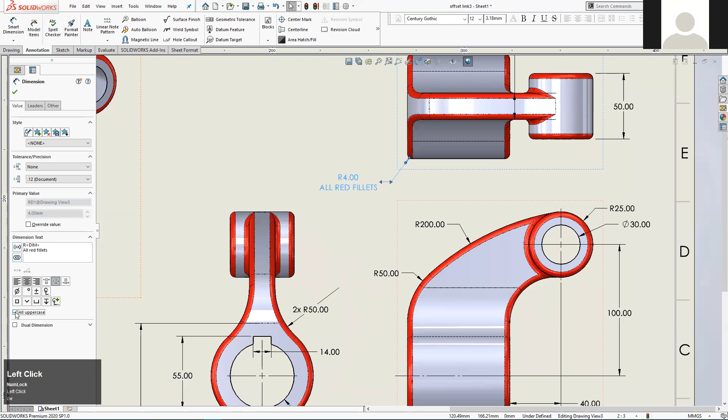So we'll do that again up here and add the little note that we need on this one. So this time I'm going to go on to the next line down below, and I'm just going to type all red fillets. Now I've specifically left mine in lowercase, and that's because there's an option there, a little tick box that says all uppercase. So that's how I tend to set mine up, because at some point I may want to turn it back to lowercase, and if you type with caps lock on all the time, you don't get that option. It will always be uppercase then. So if the option's there with the little tick box, just use it. Yeah, so that looks okay.

In terms of the annotation and the view layout, we've finished, and the only bit left to fully replicate that drawing that we were given to work from is to modify the actual title block on this sheet. So we're finished with the drawing now, and we're going into editing title block mode, which is a significantly different mode to view placement and annotation placement and the creation of the drawing content itself.

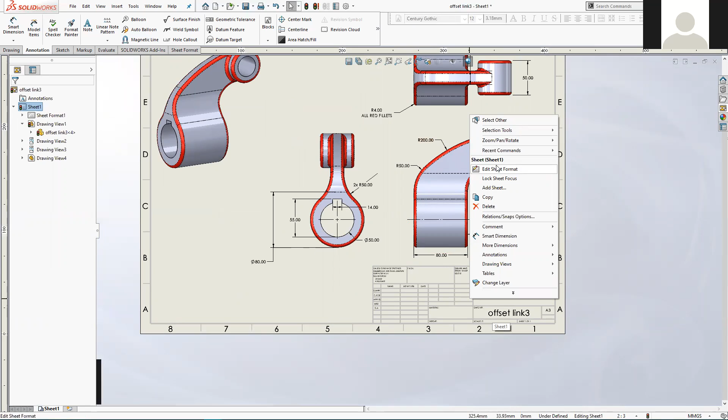So what we're going to do is put our pointer somewhere over the sheet format. So this could be over the border there, but in our case we're going to hover over the actual title block. Right click. I'm going to have to deselect this view. So mine didn't work there because I still had views selected. So I'm just going to hit the escape key until I'm sure that I've not got any views selected. And then I'll try it again. Right click, edit sheet format. There. So because I was over the sheet format, that option's available. And then all my views temporarily disappear.

And that's because if you look at my drawing tree on the left here, the views occurred after the sheet format was set. So now that I've gone back to the sheet format and I'm actually changing it, the views technically haven't been created yet. So in the same way that when we're modeling things, we can rewind time and go back to a feature that was earlier in the model tree, we've done the same thing. We've gone back to before all the views were created, and we're actually modifying the sheet format itself now. But as soon as we've finished this, we'll OK our modifications, and we will fast forward back to where we were again, which is at the end of our view creation. So they've not been deleted, they're still there, they're just suppressed at the moment.

So what we're going to do, we're going to zoom into the title block. So on this particular sheet, we don't want to edit anything about the border, so we're going to stay away from editing or deleting anything from that. It's just this title block area that we want to modify. And primarily what we're going to do is get rid of a lot of this excess information here that we don't particularly need for our drawing task.

So all of this stuff here is to do with management of a drawing department. It's to do with tracking who did which bit of work and what date it was done on, and getting them to initial or sign something so that you have traceability. So that if something does go wrong or something does go right, you can track who was responsible.

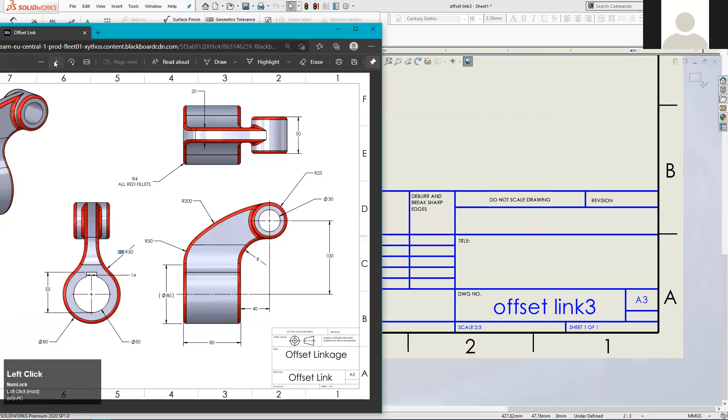So there's drawn by, checked by, approved by, manufactured by, and then quality assurance checked by, and then certain cells so you can add your own into there as well. And there's things like material, which is useful as a general rule, but in our drawing that we're aiming to replicate, a lot of this information has been trimmed away. There's extra information that we're going to add in. And when I say information, I mean the third angle projection symbol. So we're going to have to create that ourselves.

But the thing to remember in these title blocks is they're just a sketch, essentially. So I'm going to illustrate that now. Just drag this top line out of shape. You can see this is just a massive, not very well defined sketch. So the reason I'm breaking this is to show you that it's very easy to pull these out of shape. So you want to be quite careful when you're editing them.

So this is a huge underdefined sketch, and that's acceptable in this case because this sketch isn't going in to create any actual engineered part. It's just created there for the look of the table area of the drawing sheet. So it's not super critical. It's not as if you have to tolerance this. So it is acceptable to leave these sketches underdefined, as the system has.

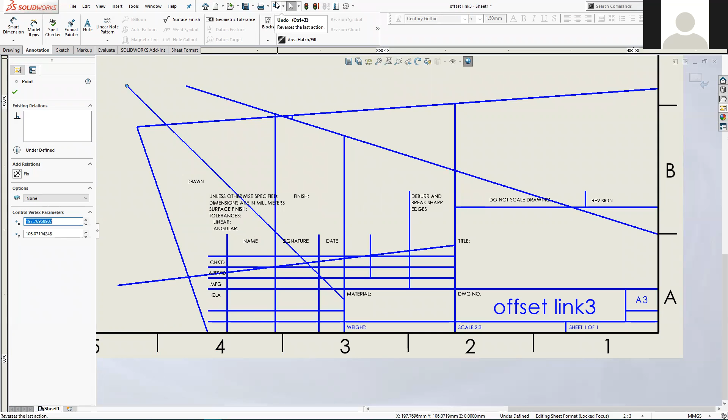So this is one of the default system formats, and you can see it's totally underdefined. Everything's coloured in blue, or the majority of things. So be careful as you're editing it, is the bottom line. So I'm going to click on undo and get back to where we were.

So essentially, what I'm going to do first is trim away all of the left-hand side cells from the cells on the right-hand side, because currently lines such as this pass through both bits of the table. So that's a single line, and it's over here and it's over here. So I want to trim them away from each other. I want to separate the table into two. And we've encountered a tool that will allow us to do that in the past, and it's called the trim tool in the sketch toolbar.

So you can see the sketch tab is available up there, so I'm going to activate it. Trim entities is what we're going to use. Power trim is the sub option of the trim tool that I want to use. And this is the one where you can just click and hold with your left mouse button and draw a freehand line. And whatever that freehand line touches gets trimmed to its nearest neighbor.

So you can see I'm just dropping down through the table. So I'm separating the table into two halves. And then I'm going to stop before I get to the border of the sheet, because I don't want to trim the border of the sheet. So I've done that. And then there's little bits of text from this side of the table that I'm going to recycle and use again. I've still got the trim tool active, so we can all make mistakes. So I'm going to exit the trim tool by clicking on the green tick, because I don't need that anymore.

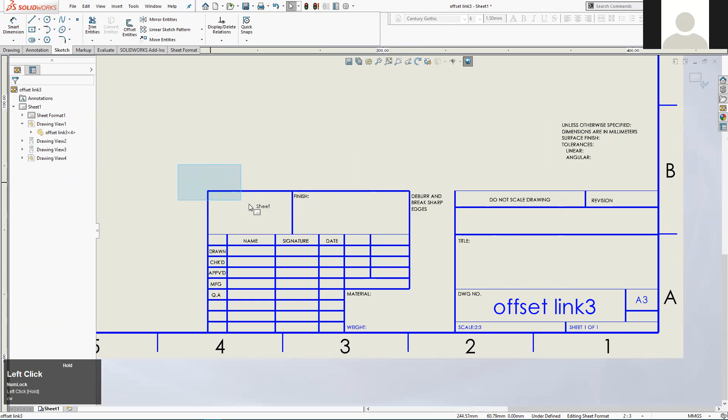Then I'm going to click and drag on this note here, because I want to use some of that again. So I'm going to put it over there. Do I want to use anything else? No, I don't think I do. So all of this here is destined for deletion. So the easiest way to do that is to do a click and drag. But remember this, if you click and drag from the top left to the bottom right, whatever's entirely inside the rectangle you create gets selected, but whatever's partially inside it doesn't get selected.

So you can see that number 3 there is only partially selected. So when I let go, the 3 won't be highlighted. Whereas if you do it the other way, from the bottom right to the top left, whatever is inside that rectangle, even partially, will then become selected. So that's sort of a neat trick, but with top left to bottom right, you have to get things entirely within that selection box to select them.

So now I've got the stuff selected, I'll just hit the delete key. It'll all disappear. So we're getting there. This note, I made the decision to edit it. So in order to edit the text, you just double click on it and you go into text editor mode. So you can just hit the delete key then and get rid of stuff, and obviously retype different content into there. So it's all quite simple, the methods that you edit these things by.

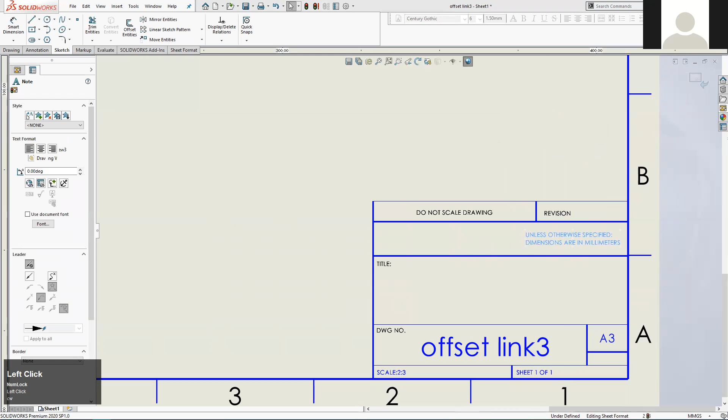I'm happy with the text now, so I just click on the tick to OK the note, and then I can click and hold and drag it into position. So I want it about there. So if I get what we're aiming for on the screen so we can see both of them together, which is easier said than done. There we go. That's kind of what we're aiming for. So we've got that bit of text there.

We want to put a line vertically there just to separate off the third angle cell from the text cell there. So I'll just use the line tool, and maybe I'll let it lock itself to the midpoint of that line. Make sure that it's vertical, and then hit the escape key. So that's that. So there's only a couple more things to do.

The offset linkage name. So the thought when you're using SolidWorks is that you would save your part not under a descriptive English language name like we have. We've called it offset link. You would tend to use some sort of code number, generally in larger companies that have maybe thousands of different parts. Calling them all a descriptive name gets problematic after a while, because you might have lots and lots of offset links. So you end up reusing the word offset link, and you end up just putting a code after it anyway. So when you save a part, normally you give it a code number.

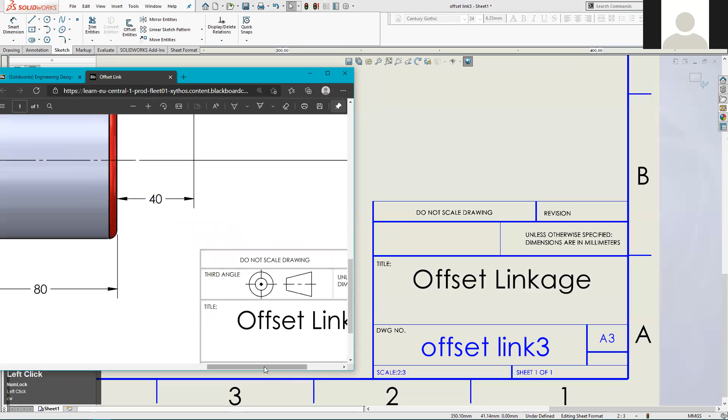So there's only one bit of this really left to do, which is the third angle symbol, which it's always a good idea to put into these drawings just to clarify which projection system you're using. So unfortunately for us, we've got to just draw this as a freehand sketch, if you like. So we know how to use the sketch tool. We know how to use the circle sketch tool. We know how to use the line sketch tool, although we're going to use a slightly different option for the line tool.

So we kind of want to draw it here. And again, you could get a bit hung up on this and dimension it perfectly, but I've done this so many times, I tend to just do these freehand. So circular sketch tool from the toolbar at the top. I'm going to do the external circle first, and I'm going to go near the boundaries, but I'm going to leave a little bit of space because I know I want a center mark that passes beyond the edge of this circle, so somewhere there is fine.

Then I'm going to sketch the inner circle, so obviously I want to lock it to the center point of that first circle, so I'll hover over there and click. Somewhere around that sort of scale is about fine. So there's the two circles. Then I'm going to hit escape because I don't want to sketch any more circles, so I'm getting out the circular tool. I want to create some lines, but initially I'm going to create some, I suppose you'd call them projection lines, off to the right here.

So I'm going to create some horizontal lines out to the right that give me a reference to begin creating my conical shape when you view it from the sides, because that's what we're drawing. We're drawing a cone when you're viewing it end on, and then we're drawing a cone when you're viewing it kind of from the side. So I suspect when you've done this using hand drawing techniques, this is kind of what you did. You had to create some projection lines first to give you a reference and to ensure that this side view is aligned with this first view. So I'm going to do that now.

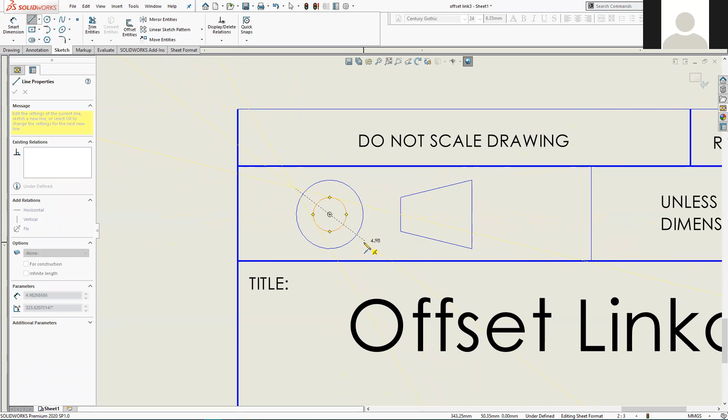So I set where the middle of the line was, and as I drag outwards, the two sides of the line grow and shrink equally with each other. So I'm going to put one of these in vertically there, click, and then press escape just to see what I've got. Yeah, that looks good.

And then do the same thing again for the horizontal one. So line tool, midpoint line, drop the first point in the center of the circles, drag outwards, click, and then press escape. So yeah, that looks okay. Then I'm going to get a standard line, so not a midpoint one this time. And because I've put these two in here, the system wants to align this new line to them.

So you can see when I get horizontally aligned with that previous horizontal line, it gives me a little dashed readout there. So it tells me when I'm perfectly aligned with it. When I am, I just click and then click again to place this one.

So we're nearly there. Let's change the appearance of this center mark and center line to dashed, so it's different to the solid lines that are marking out the edges of the cone. So I'm going to click on that line, hold down Control, click on that one, click on that one. So I've got them all selected, and then select that option there on the far left at the bottom for construction, and it will change the line font to a dashed center line style font.

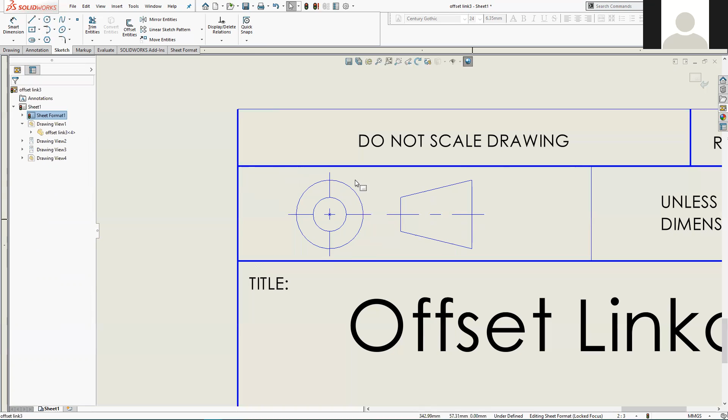So two more steps. I want to add a little bit of text here in the correct font and the correct size, just saying third angle. I want to move these two symbols to the right slightly, and then I'm pretty much done with editing the sheet format. So in order to move these, because they are totally undefined sketches, they have no relations. Well, they have some relations on them, but not enough to fully define them.

Let's say I try and box select that one and then try and drag it. Oh, it's actually working. Wow, I'm impressed. I didn't think I was able to do that. But anyway, what I was going to say is there's an easy way to move them as a sort of block drawing, and it's that option there, move entities.

Click on move entities, do a box select to select everything you want to move, like that, and then it's just a from and to click. So I want to go from the center of that circle, let's say, and then as I drag, let's try again. So those are all the things that I'm going to move, all the things that I selected. Click down here to tell it what point I want to move from.

I want to move from the center of the circle, and you can see it just follows my mouse pointer. So I can move it to wherever I need, and then when I click there and OK the move, so I'm OKing the move up here, they've moved. So that's arguably the safest way of moving them, because, as I say, it is easy to drag them out of position and ruin all your good work because they're not locked in position at all. So you've got to be really careful.

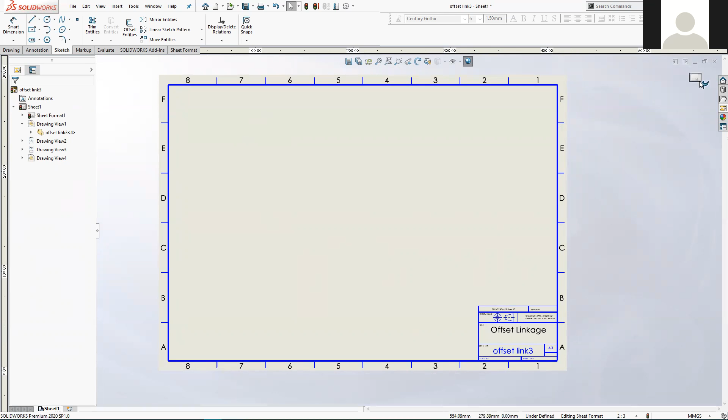You have to OK the edits that you've made in order to get back into the drawing and be able to change the views or add dimensions. And it's that icon at the top right. So it's very similar to the exit sketch icon, you can see, except it's got a picture of a sheet format. So click on that.

You're no longer editing the sheet format. Those changes have been kind of locked in. You're not able to double click on them and change them anymore because you're not editing the sheet format anymore. You're editing the sheet itself. So we kind of finished there.

Certainly replicating that drawing. So what you would do normally is, first thing you would take is save of that drawing. The system may say you haven't saved the part in a while. Do you want to save all, save everything? I'm going to say yeah. It may then say there are views on this sheet that haven't been updated recently. Do you want to update them to ensure their newest sort of revision before you save? Yes, I do. So you can just answer yes to both of those.

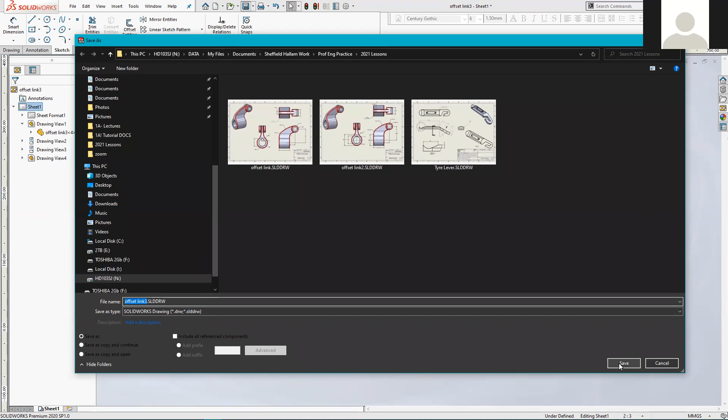Then it'll prompt you for a location. I suggest you keep all your drawings in exactly the same folder that you keep their parts in. It just avoids a lot of problems further on down the line. So keep the drawings and the parts together in a single folder. It will give it a default name, which is just the name of the part. I suggest you accept that as well. Again, naming your drawings differently to the parts that they're a drawing of is fraught with problems. So just accept that and save.

And then at that point, the chances are you're not going to share this drawing with either a colleague or a supplier or a customer in its SolidWorks format. The chances are you're not going to send them the SolidWorks drawing file. You're going to send them something like, let's say, a PDF. So we'll create a PDF of this now. So File menu, Save As rather than Save. And then rather than a SolidWorks drawing type, just change it to PDF. You can see I've done this once already because I've got a copy, but I'll do it again. Click on Save.

And then it should just be as simple. It should save it out. And then I think by default, SolidWorks will open up your PDF viewer if you've got one installed on your system, and it will actually show you the result of that. So you can just check and see. Sometimes what you've got to play with a little bit is the edges or the lines here might be in a font which is too thick, let's say.

So there are a few options that you can play around with before you OK a new PDF save. So I'm just doing it again. PDF options, there's some options in here that you can play with, but hopefully the default options will be okay for you. So you can set the quality of it in dots per inch. You can activate and deactivate certain things. So you can play around with that, but that will be unique to each kind of drawing that you're creating. Some of them you'll have to play around with a bit, and others not.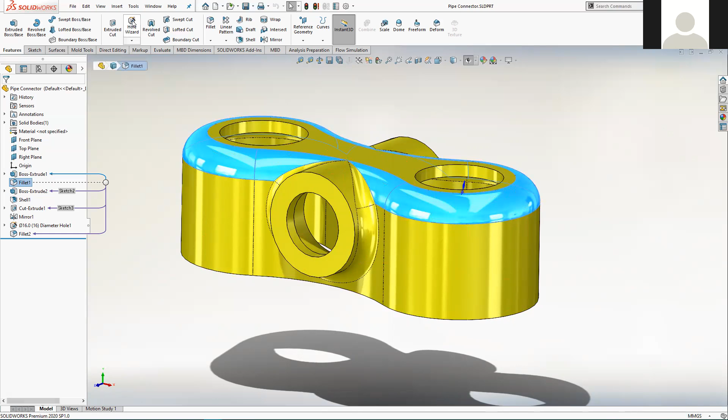We used a little bit of the Revolve tool, but there are some much more complicated modeling tools that for a 5-week course, it's unrealistic to get up into. So yeah, lots of repetition of tools that we've used, but using them in slightly different ways. So you can see this part, it's what's termed a pipe connector. So you can see that there's potentially some pipe-shaped objects that fit through these little internal bores, and then there's a cross piece that goes through here as well.

So you're free to download that, and the nice thing is you can pull my model apart, as in you can use this rollback bar at the bottom of your screen, and if you click and hold on that, you can rewind back through the modeling process. So again, we covered that was possible once, I think, but it may have slipped your memory. So that bar, if you click and drag on it, you can go all the way back to the start, where I created just a simple Boss extrude shape.

So you can see how I modeled this thing up, how I built it step by step. So that in itself is worth having a little poke around and seeing how it actually was built. But what we're going to do is jump straight into replicating the drawing of it, which is arguably a little bit of a simpler drawing than the one that we've just tackled. And the sheet format hasn't been edited on this because we covered that skill in the last drawing that we did. So it's just create an initial view, which is this one, do a couple of projected views away from it. We know how to do that.

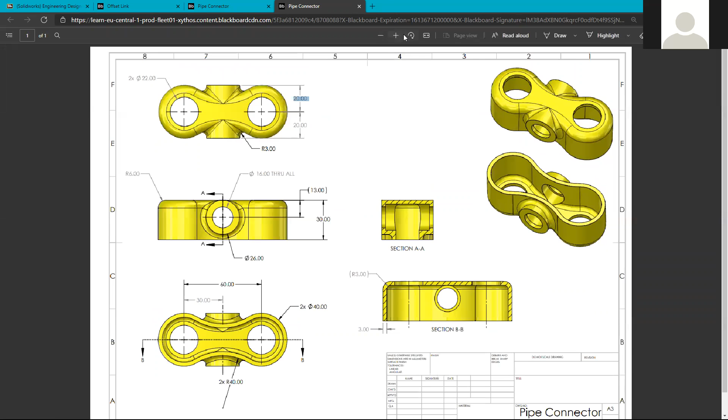And then again, I've left the default system behavior on here, which is, clicked on the wrong button there, the smart dimensions are still colored in gray. So you can see which ones I've had to manually insert and which ones have actually been imported from the part itself. So yeah, that's what we're aiming for. So let's go as quick as we can on this one.

And seeing as we're looking at the part, we can go File, Make Drawing from Part. There is a drawing file with the same name as this, so my system's clocking that I've already made a drawing from this. And I'm going to say, no, I don't want you to open that drawing, I want to create a new drawing. So you won't get that.

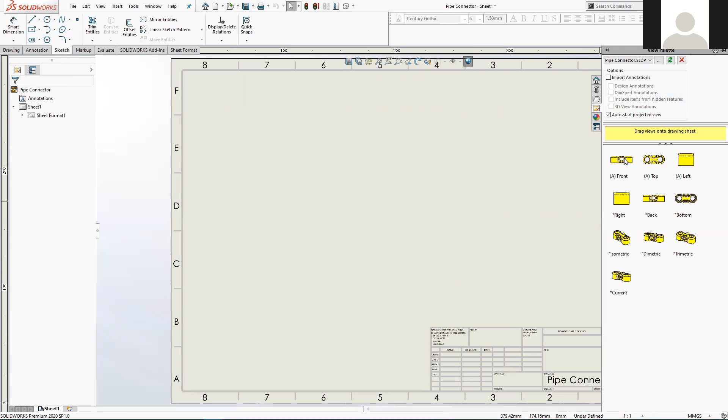Again, I've based this on an A3 ANSI sheet, so we don't have to change the settings there. It should have kept it from the last time that we used it. And again, we've already decided what the primary view, or the parent view or the first view, is. It's going to be this front one here. So I'm just going to click and drag that one onto the sheet.

And then maybe before I do my projections, I might change the display style. No, I won't actually, because I'm only changing the projected display style there. That was a mistake. Oh dear. So yeah, you don't do that. We'll change them in a second. So I'm going to project upwards and I'm going to project downwards like that. And that's it. In terms of the initial view and the projections of it, that's all I want. So I'm going to hit the escape key to get out of that menu.

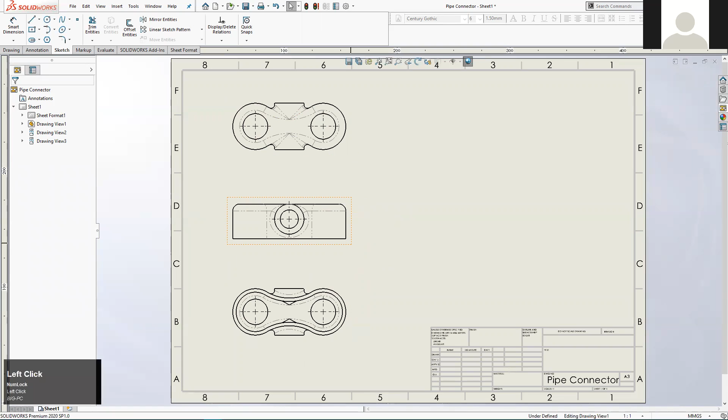Then I'll set the shaded options because I want these views shaded again. So I'll click on the original one, the first view that I placed, the parent view. Set it to shaded with edges, which we kind of did before. And then because I rather stupidly messed around with this one, its link to its parent is broken now. So hopefully yours hasn't, but I'm going to correct that.

I'm going to select that view and I'm going to tick that box, Use parent style. And then I might have to do a rebuild, so that's that icon at the top. Ooh, still not working. Might have to do a full rebuild. There you go. So we've got the projected views. Let's put the section views in next.

So we're creating views, so we want to be in the first tab. We're not adding annotations yet, and we're certainly not sketching things freehand. So first tab, which on my system is called Drawing. I want to create some section views. So the section view option is right there. First view, I want to use a vertical section line, so I'm going to choose that.

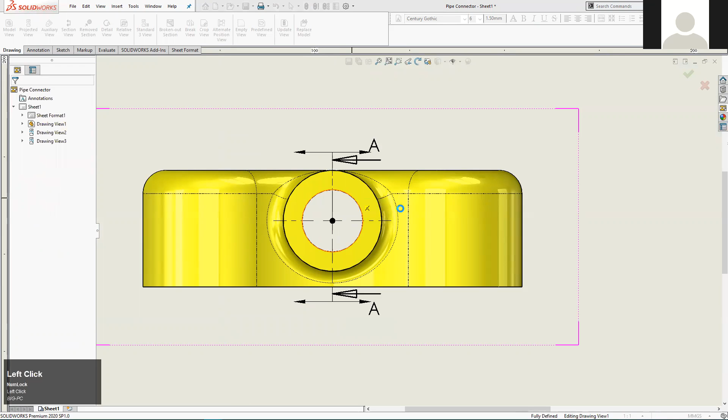And then I'm going to drag it over the view that I want to section. In this case, I want to lock it into the dead center of that whole part, so right in the center there of that hole through the part will do. So click. I don't want any fancy options for this line, I just want a normal, straight, vertical section line, so I'm just going to OK on that menu. And then I want it projected out to the right away from the parent view there. So I'll click again. So that's that one taken care of, kind of done in terms of laying it out.

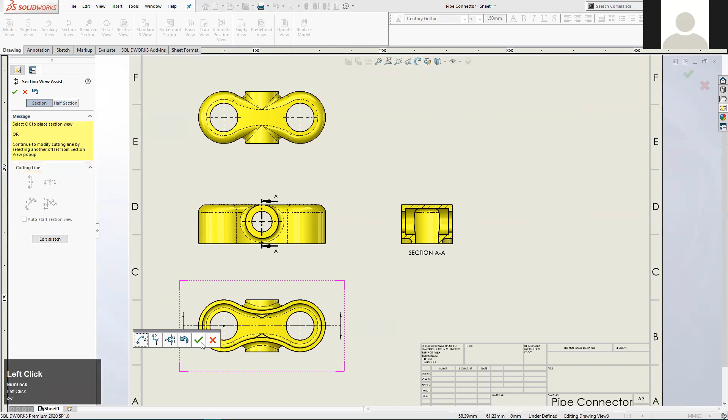And then I want to create a second section view, so I want to section through at 90 degrees relative to that one. So section view again. This time it's going to be a horizontal section line, so change it to horizontal. Again, because there's a line of symmetry running down the center of this part, I want to stick my section line to that dead center. So I can just go into the center of one of these hole features and get this line to lock itself onto there. So that's that one. Again, I don't want any extra features, so I'm just going to click on OK.

And this one's going to, again, try and align itself to its parent there, which is not what I want in this case. So I'm just going to place it temporarily off the sheet down here, like that. I do that just because it makes it more legible. It's not obscuring any sheet border then. It's just a little bit more legible.

And then the direction that I'm viewing that section from, which is indicated by these arrows on the section line, is not what I want. I want to view it in the other direction. So I've still got that section view selected.

You can see it's highlighted in that pale blue color on the rectangle that's around it. So I can click on this option because, again, whenever you've got a view selected on the left hand side there, you get all the setup options related to that view. So flip direction will do that.

So you can see the arrows are flipped, the orientation of the view's flipped, because essentially what I've done, I've taken a knife, chopped this part in half, discarded this bit where the arrow tail is, and I've kept this bit where the arrowhead is pointing towards. So that's what I'm looking at there. And then I don't want to edit the section view anymore, so I can either click on the green tick or press escape to deselect that view.

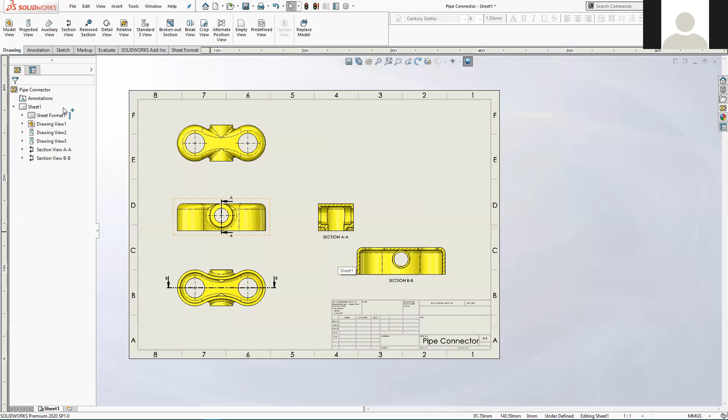And then what we should be able to do is just click and drag it to wherever we need it, wherever we've got some kind of free space to accommodate. So we've done those views. Let's just put a couple of those 3D views in the corner, which we should be getting quite good at now. So again, I'll hit escape because I want to deselect that view. I'm just adding normal views of the model. They're not created from any other of these views. They're just their own self-contained viewpoint of the model itself. So model view.

Now I have two parts open, so you can see the behavior of this menu. If I really wanted to confuse things, I could bring the offset link in now and put an image of the offset link on the same page. Occasionally you might want to do that. Occasionally on certain drawings you need to show a different part just for reference. But in our case, it's this pipe connector that we're creating a drawing of, or creating a view of. So click on pipe connector, click next.

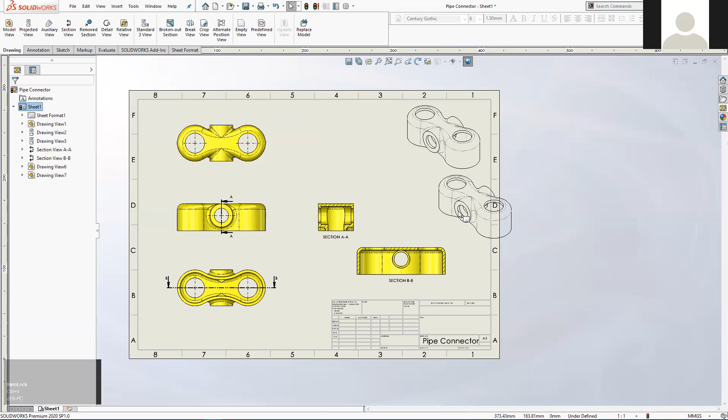What sort of view do we want? We want that isometric as our starting point. And then I'll click. And then at this point, I don't want to change anything about that, so I'll hit escape to deselect it. And then if I reselect it and go to the edit menu at the top, I should be able to do a copy and paste. So copy, click in some empty space, and then I'm going to do the keyboard shortcut, which is Control and V. Yeah, and I get a copy there. So that's just an easy way of getting two 3D perspective views.

So I'll just change the display method for both of these. So click on the first one, switch it to shaded with edges, click on the second one, switch it to shaded with edges. And then I'm just going to adjust my viewpoint of these two views by selecting one of them, 3D drawing view icon, and I want to be able to see down through those top holes a little bit, just to see that they cut all the way through the part down to the bottom like that. Then I'll OK that one, select the other 3D view and do the same thing. Rotate round so I'm looking kind of the opposite way at the part this time.

Something like that. So it gives you a good indication of what the overall shape of this part actually is. So we've got both of those. Yeah, so I'm reasonably happy with the views now. So then we'd move on to annotating them in various ways, the main one being adding the dimensions, obviously.

So let's go into the annotations tab. Let's try doing some imports. So let's import some dimensions onto that view at the bottom first. So I'm going to zoom in a little bit. So I've pre-selected the view again. Pre-select the view, click on model items, and then drawing views being selected. Where do you want to bring your dimensions from? The entire model in this case. Everything else is set as we need it, so click on OK.

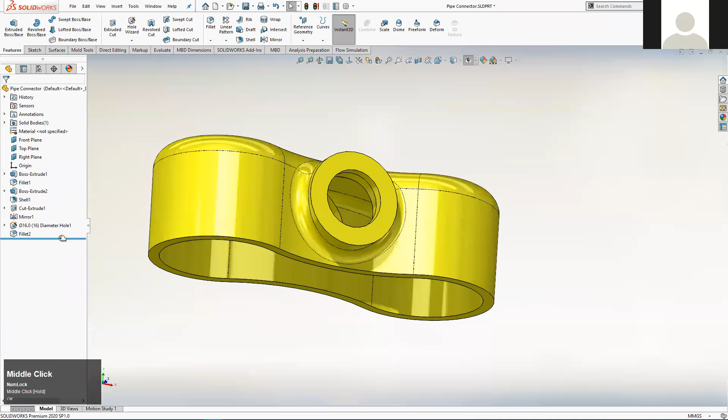I'm just searching for one that on the reference image is a smart dimension. So the wall thickness for whatever reason wasn't importing. So that is defined within the shell feature. There's a shell feature that's been used in this part. So I'll show you it as it comes into being. So the part at one point was like that, solid, and then the shell feature was applied to it, and it hollowed it out and gave it a wall thickness. So obviously that shell feature has a wall thickness stored within it. There it is, 3 mil.

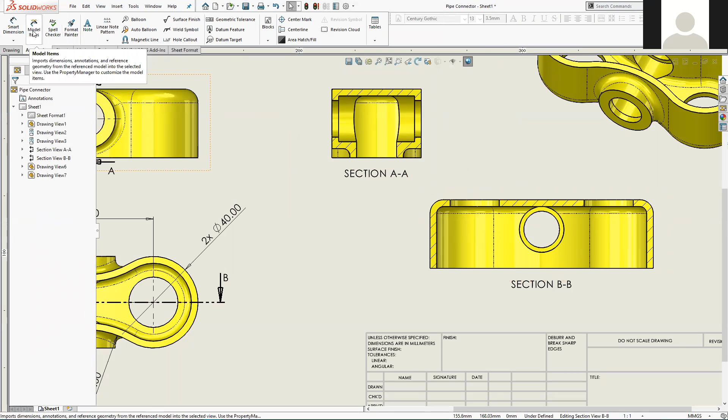But because that wasn't created on a sketch that was on a plane, when you're trying to import that sort of dimension into a drawing, it doesn't always get applied in a location that is that legible on the drawing. So what I had to do was not accept that as an import, as a model item, and just use the Smart Dimension tool and add it in myself. And that's why on the reference image, that one is shown as grey. So that one specifically, and a few of the others as well.

But I've left the default grey and black colour on that PDF just to illustrate to you which ones I've had to manually create, sorry, and which ones I've actually used the model items to import. So this has got a more even split. The way that this was modelled didn't lend itself always to just importing the dimensions. They either weren't clear on the drawing or they were just in the wrong location. I wanted them attached to another piece of the drawing.

So I think, unfortunately, we'll run out of time for the session. But yeah, we got a decent way into that. And I think we've got a good handle now, hopefully, on the procedure that you've got to go through. If you're supplied with a part drawing, and your task is at the bare minimum to model it up, you should have the tools to pull it apart in your mind first and decide on what order of features you're going to use to create it. And then once you've got it created, the steps that you've got to go through to actually set the drawing of it up and import the views into the drawing.